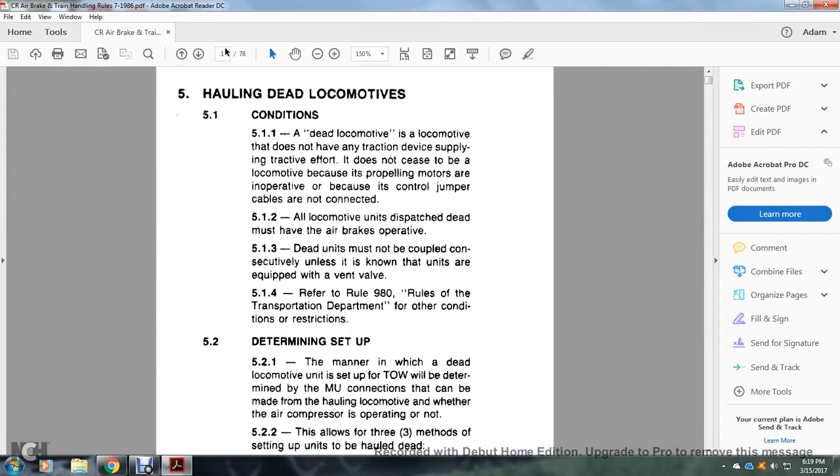Hauling dead locomotives. Consolidated Rail Corporation Air Brake Train Handling, Chapter 5.

Chapter 5, Hauling Dead Locomotives, Conditions, 5.1.1. A dead locomotive is a locomotive that doesn't have any tractive device supplying tractive effort. It does not cease to be a locomotive because the propelling motors are inoperative or because the control jumper cables are not connected. All locomotive units dispatched dead must have their air brakes operative.

Dead units must not be coupled consecutively unless it's known that the units are equipped with a vent valve. Refer to Rule 980, Rules of the Transportation Department, for other conditions or restrictions.

Determining setups, 5.2. 5.2.1. The manner of setup of the dead locomotive or tow unit will be determined by the multiple unit connections that can be made from the hauling locomotive, whether the air compressor is operating or not.

5.2.2. This allows three methods of setting up the units for hauling dead: 1. Dead in consist. 2. Dead in train, main reservoir pressure available. 3. Dead in train, main reservoir pressure not available.

5.2.3. A unit set up dead in consist must, in addition to the brake pipe, have all three multiple unit hoses — main reservoir, actuating, and application and release — connected to the hauling locomotive consist with the coupling cocks open.

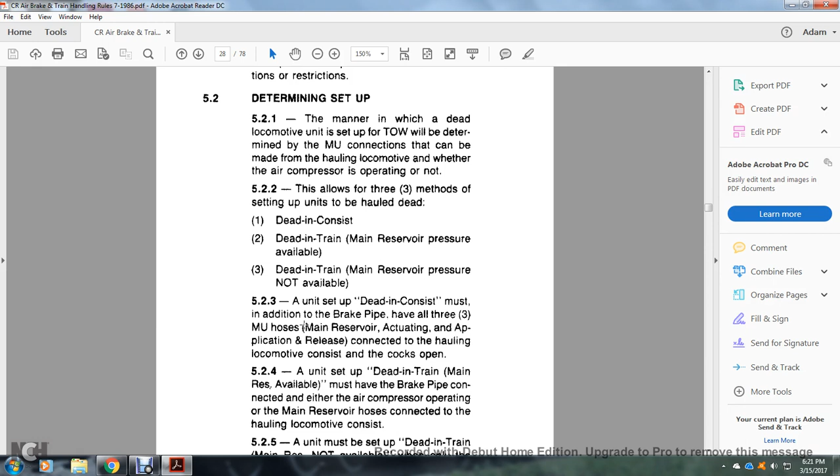5.2.4. A unit set up dead in train with main reservoir available must have the brake pipe connected, with either the air compressor operating or the main reservoir hose connected with the hauling locomotive consist.

5.2.5. A unit set up dead in train with main reservoir not available is when only the brake pipe connection can be made; the air compressor is not operating.

5.3. Setup dead in consist. Brake pipe hose coupled with the coupling cocks open. All multiple unit hoses properly coupled with the cocks properly positioned for the train lineup.

5.3.3. Automatic brake valve cut out. 5.3.4. Independent brake valve cut out by placing the double-ported cutout cock in the out or closed position, and by placing the multiple unit 2A valve in the trail, 24, or 26 position.

5.3.5. Remove and secure the automatic and independent brake valve handles. Secure the number 6 automatic brake valve handle in the running position. 5.3.6. A unit may be set up this manner whether the air compressor is operating or not.

5.4. Setup dead in train, main reservoir available. 5.4.1. Brake hose is coupled and cocks are open. Air compressor must be operating, with the main reservoir hose coupled to the hauling locomotive consist, providing main reservoir pressure for the dead unit.

5.4.3. Automatic brake valve cut out. 5.4.4. Independent brake valve cut in by placing the dual-ported cutout cock in the in or open position, or by placing the multiple unit 2A valve in the lead or dead position.

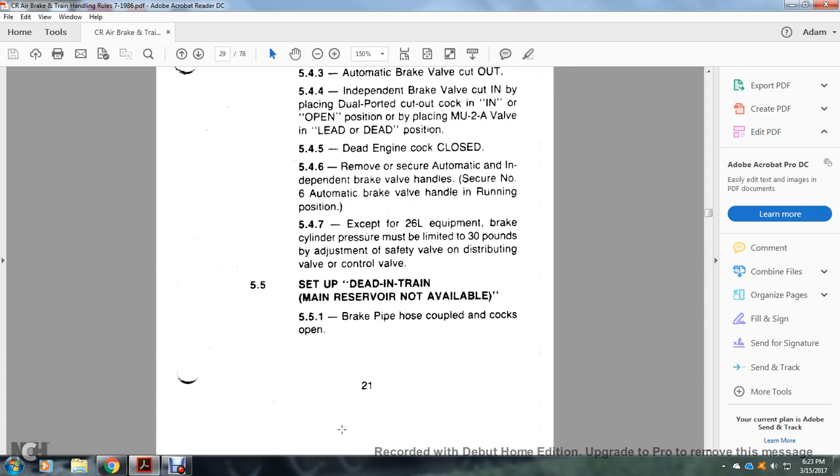5.5. Setup dead in train, main reservoir not available. 5.5.1. Brake pipe hose coupled, cocks open. Automatic brake valve cut out.

Independent brake valve cut in. Dead engine cock must be opened after the main reservoir pressure has been reduced to below 25 pounds.

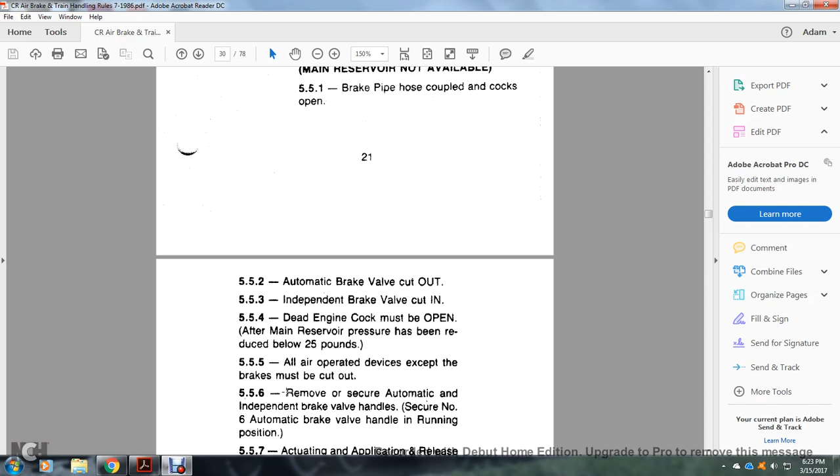5.5.5. All air-operated devices except for the brakes must be cut out. Remove and secure the automatic and independent brake valve. Secure the number 6 automatic brake valve handle in the running position.

6. Makeup of trains. 6.1. General. 6.1.1. Before connecting the yard air supply or locomotive, condensation must be blown from the pipe which supplies air pressure. 6.2. Connecting brake pipe. 6.2.1. Air hose must be coupled properly between all cars.

6.2.2. Angle cocks must be opened slowly and locked. 6.2.3. Open the angle cock nearest the locomotive or yard air supply first.

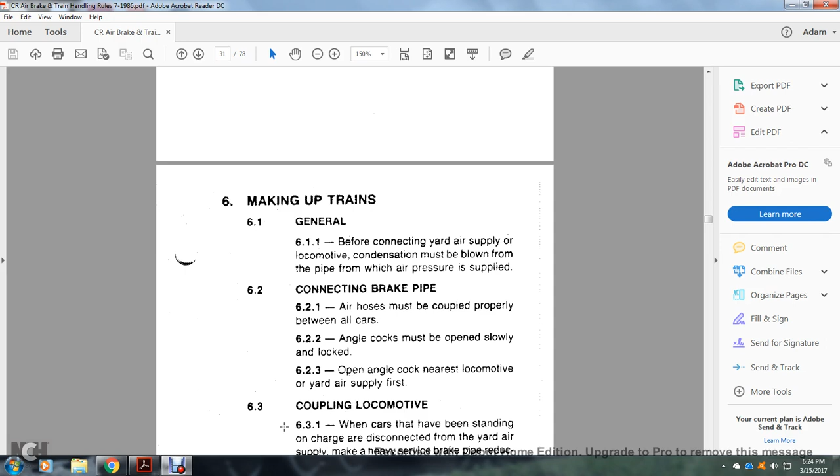6.3. Coupling locomotive. 6.3.1. When cars have been standing on charge are disconnected from the yard air supply, a service brake pipe reduction must be made by slowly opening the angle cock before coupling the locomotive or other cars. 6.3.2. When sufficient reduction is made, close the angle cock slowly to avoid unintentional release of the brakes.

6.3.3. After coupling the locomotive to the train, the couplers between the locomotive and train should be stretched to see if the coupling has made, then open the angle cock slowly. 6.3.4. While the train is being charged, locomotive brakes must remain applied.

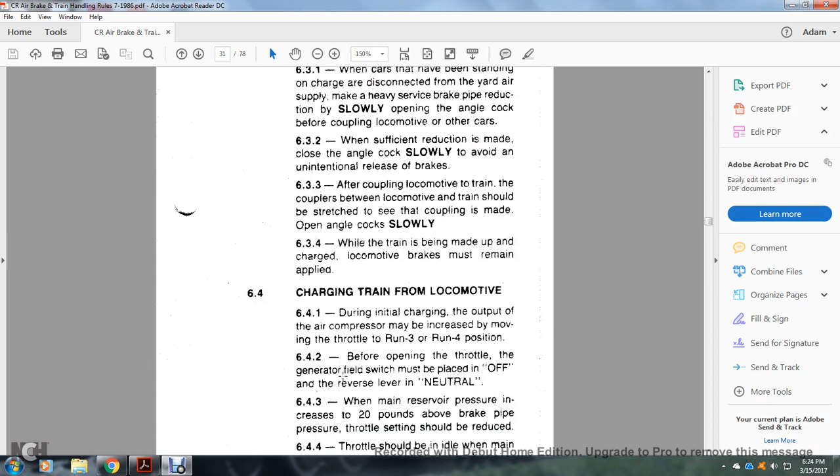6-4, charging train locomotive. 6-4-1, during the initial charging, the output of the air compressor may be increased by moving the throttle to the run 3 or run 4 position.

6-4-2, before opening the throttle, the generator field switch must be placed in the off position, and then the reverse lever in neutral. 6-4-3, when the main reservoir pressure increases to exceed brake pipe pressure by 20 pounds, the throttle setting should be reduced. 6-4-4, throttle may be idle once the main reservoir pressure exceeds brake pipe pressure by 30 pounds.

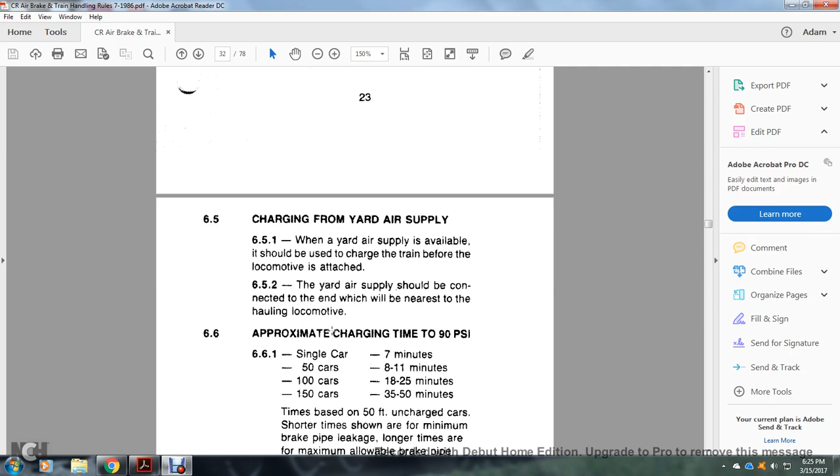6-5, charging from the yard air supply. 6-5-1, when the yard air supply is available, this should be used to charge the train before the locomotive is attached. 6-5-2, the yard air supply should be connected to the end of the train which is nearest the hauling locomotive.

6-6, the approximate charging time to 90 psi: 6-6-1, single car 7 minutes, 50 cars 8 to 11 minutes, 100 cars 18 to 25 minutes, 150 cars 35 to 50 minutes. Times based on 50-foot uncharged cars. The shorter times shown are for minimum brake pipe leakage, and the longer times are for maximum allowable brake pipe leakage.

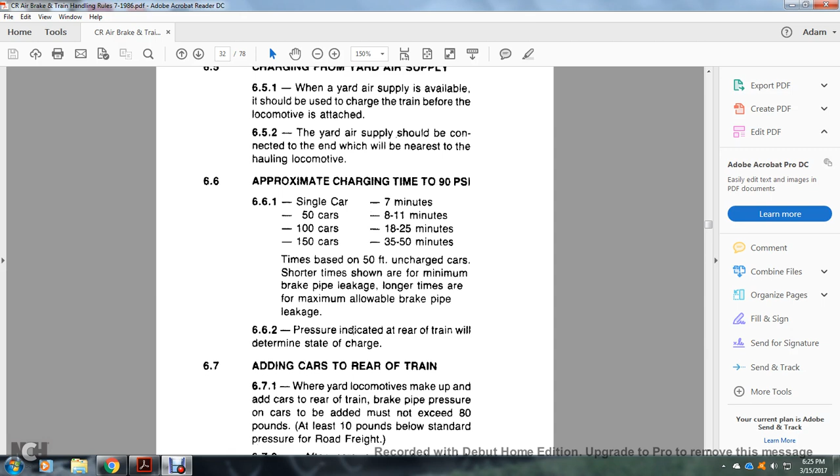6-6-2, pressure indicated at the rear of the train will determine the state of charge.

6-7, adding cars to the rear of the train. When using a yard locomotive to make up and add cars to the rear of the train, the brake pipe pressure on the car to be added must not exceed 80 pounds, at least 10 pounds below the standard pressure of the road freight. 6-7-2, after the cars are equipped, couple with stretching coupling.

6-7-3, before the air hoses are coupled, make a full service reduction on the added cars. 6-7-4, after the reduction is completed, slowly close the angle cocks between the yard locomotive and the added cars. 6-7-5, couple air hoses between the added cars and the freight train and slowly open the angle cock.

7-6, the road engineer must make a proper test of the air brakes.

7. Train air brake inspection. Brake pipe and connections: brake pipe hoses must be properly coupled and in condition for service. The angle cocks and cutout cocks must be positioned properly. Reservoir drain valves must be closed. The air brake system must be charged to the required pressure.

Examination must be made for leaks and necessary repairs made to reduce leakage to a minimum. Employees must be equipped with tools and materials necessary for changing defective air hoses, hose gaskets, and tightening leaks. Retaining valves and pipes must be in condition for service, with handles positioned properly.

Brake rigging: the brake rigging must not bind or foul. All parts of the brake equipment must be properly secured at least 2-3/4 inches above the top of the rail. Hand brakes must be released unless needed to secure cars.

Piston travel: initial terminal piston travel on a body-mounted brake cylinder which is less than 7 inches or more than 9 inches must be adjusted to a nominal 7 inches. Maximum piston travel on a truck-mounted brake cylinder must not exceed 6 inches.

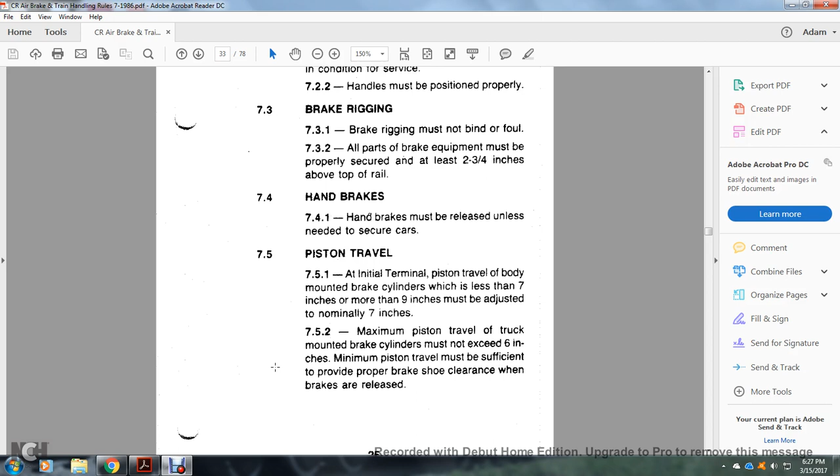Minimum piston travel must be sufficient to provide proper brake shoe clearance when brakes are released. On cars equipped with other than standard single capacity brakes, the piston travel must be adjusted as indicated on the badge plate or stenciling near the brake cylinder on the car.

Before adjusting piston travel or working on the brake rigging: the car brake must be cut out and released as described in 832. When the cutout cock is provided with a side vent for the brake cylinder pipe, the cutout may be closed and the reservoir need not be drained.

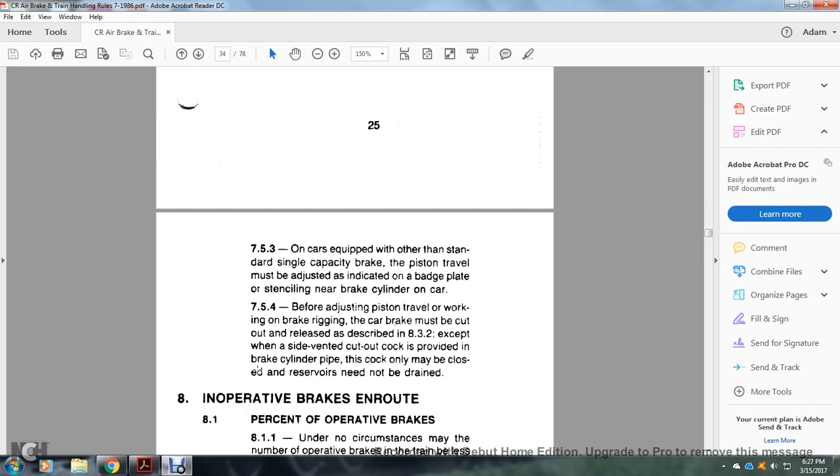8. Inoperative brakes en route. A percentage of operative brakes: 8-1-1, under no circumstances may the number of operative brakes on the train be less than 85% of all the cars in the train. Each locomotive, except the leading unit, should be counted as one car in determining the percentage of operative brakes.

When the piston travel is more than 10.5 inches, the air brake cannot be considered operative. In order to maintain 85% operative brakes, the maximum number of cars with inoperative brakes must not exceed the following ratio.

Alright, inoperative brakes. Total cars in train count: 7, 2, 14, 3, 20, 4, 27, 5, 34, 6, 40, 7, 47, 8, 54, 9, 60, 10, 67, 11, 74, 12, 80, 13, 87, 14, 94, 15, 100.

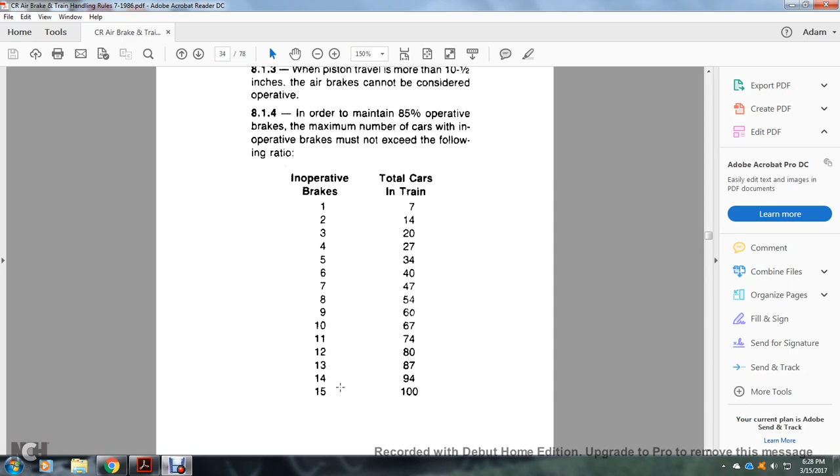8-2, placement of cars with inoperative brakes. Cars on which the air brakes become inoperative en route may be hauled without change of position in the train, provided that no more than 2 cars with the brake cutout are in consecutive order.

Cars picked up en route with inoperative brakes may be hauled to the next repair point. A defective air brake form EC100 must be attached with the brake pipe near the angle cock at each end of the car, with no more than 2 cars with the brake cutout in consecutive order. Revised June 15th, 1986.

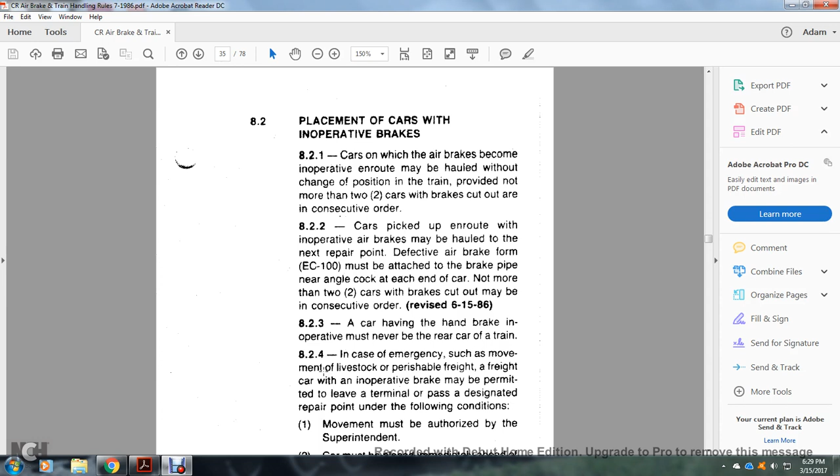A car having the handbrake inoperative must never be at the rear of the car of the train.

In case of emergency, such as the movement of livestock or perishable freight, a freight car with inoperative brakes may be permitted to leave a terminal or pass a designated repair point under the following conditions.

Movement must be authorized by the superintendent. Cars must be placed immediately ahead of the caboose or the rear of the train.

The brake hose must be connected with the angle cocks open. Brake pipe damaged cars must be coupled as described in 825.

825. If the brake pipe is damaged, the car must be coupled at the rear of the train, with the brake pipe hose connected to the angle cock, closed at the leading end of the damaged car.

826. A vehicle equipped with brake pipe only must be placed immediately ahead of the rear of the train, with the air brake operative on the rear car. No more than 2 such vehicles are to be included in any train.

83. Cutting out car brakes. Air brakes must be cut out on a car when the brake does not release properly because of binding or a fouling brake rigging.

Defective control valve brakes also must be cut out on a car being moved with overheated journals. To cut out the brake on a freight car, close the cutout cock in the branch pipe of the control valve, and place the handle in line with the pipe.

Release the air pressure from the reservoir by pulling the reservoir release rod to the limit and holding it until the air pressure is exhausted. Check that the piston rod is retracted to ensure the cylinder pressure has released, and check that the brake shoes are released from the wheels.

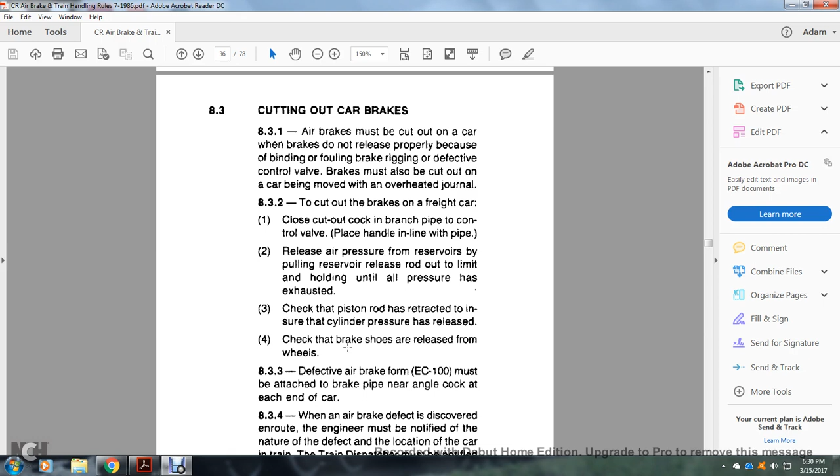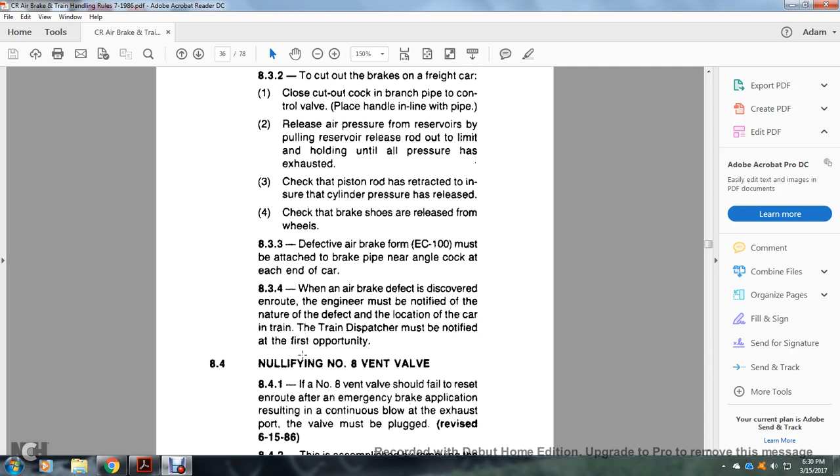A defective air brake form EC100 must be attached with the brake pipe near the angle cock at each end of the car. When a defective air brake is discovered en route, the engineer must be notified of the nature of the defect and the location of the car, and the train dispatcher must be notified at the first opportunity.

84. Nullifying the number 8 vent valve. If the number 8 vent valve should fail to reset en route after an emergency brake application, resulting in continuous blowing of the exhaust port, the valve must be plugged.

Revised June 15, 1986. This is accomplished by removing the vent protector and inserting the plug, which is integral with the vent protector, into the exhaust port.

The defective air brake form EC100 must be attached with the brake pipe near the angle cock at each end of the car.

85. Failure to maintain adequate pressure. 851. When the pressure required for safe handling of the train cannot be maintained, the train must be stopped and secured. If the main reservoir pressure drops 5 pounds below the standard brake pipe pressure, the train must be stopped using full service.

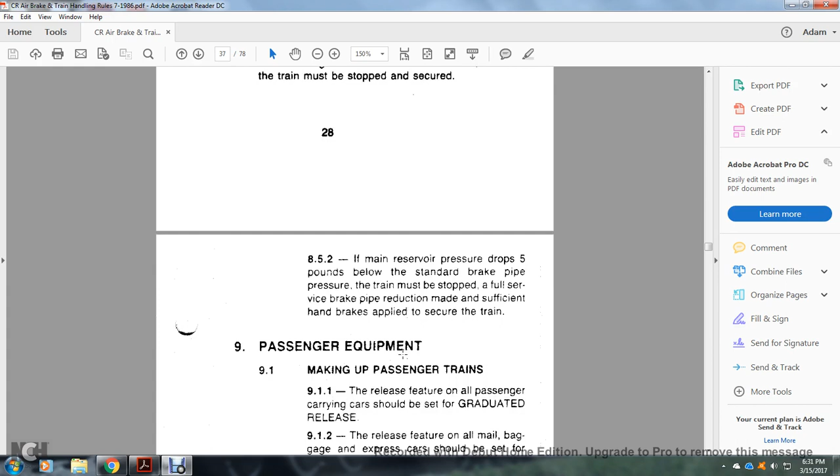All right, making up the passenger train. The release feature of all the passenger carrying cars should be set to graduated release. The release feature of all mail, baggage, and express cars shall be set for direct release.

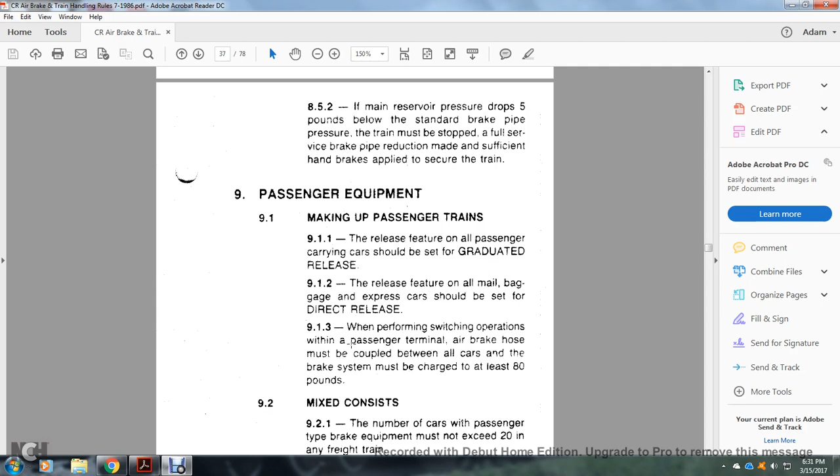When performing the switch operation for the passenger terminal, a brake hose must be coupled between all the cars, but the brake system must be charged at least 80 pounds.

Mixed consists: the number of cars with passenger type brake equipment must not exceed 20 in any freight train. All such cars must be located forward in the 40th car unless authorized by the superintendent.

When moving passengers in the freight train, the release feature will be set with direct release with the water raising and the system cut out. When moving business cars in the freight train, the release feature must be set with direct release.

9.3 Communicating signal system. The communicating signal system must be tested before leaving the initial terminal. If necessary, the train may proceed with the communication signal inoperative, but the train crew and engineer must be notified.

9.4 Brake test, passenger. The initial terminal test must be made on the passenger train under the same conditions, in the same manner as the freight train, with the following exception: the passenger train must be charged not less than 90 pounds before starting the test.

If the train is operated with electro-pneumatic brake operation, the system must be tested after testing the automatic brake. For the electro-pneumatic air test, make a 20-pound EP application, inspecting to see the air brakes have applied properly, then released properly.

9.4.2 Running tests, described in Rule 15, must be made on all passenger trains after leaving an initial terminal, at any point where the locomotive or engine crew of the train has been changed.

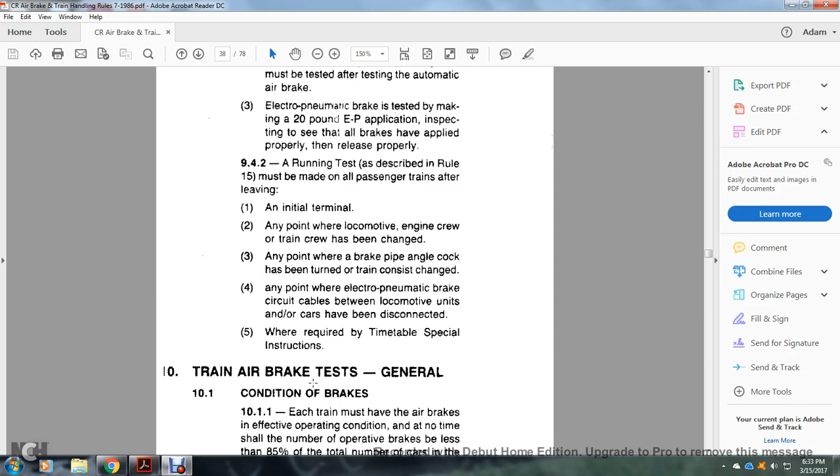At any point where the brake pipe angle cock has been turned with the train consist changes, or at any point where electro-pneumatic brake circuit cables between the locomotive units or cars have been disconnected, required by timetable special instructions. 10. Train air brake test, general.

Condition of the brakes: each train must have the air brakes in effective operating condition. At no time shall the number of operative brakes be less than 85% of the total number of cars in the train. If leaving the initial terminal, the 1,000-mile inspection must have the air brakes on all equipped cars.

The effective operating condition on all other cars: if the air brakes become inoperative, the train may continue provided not less than 85% of the cars in the train have operative brakes.

10.2 Responsibility. Supervisors, inspectors, and engineers of the train are jointly responsible for properly testing air brake equipment, or air brake equipment on the locomotive and car. They are responsible for detecting defects that can be disclosed by the required air brake test. This is required for the terminal air brake test.

Initial Terminal Test, Rule 11. The test must be made before the train is started, to determine the brakes on each car are in suitable condition to make a trip.

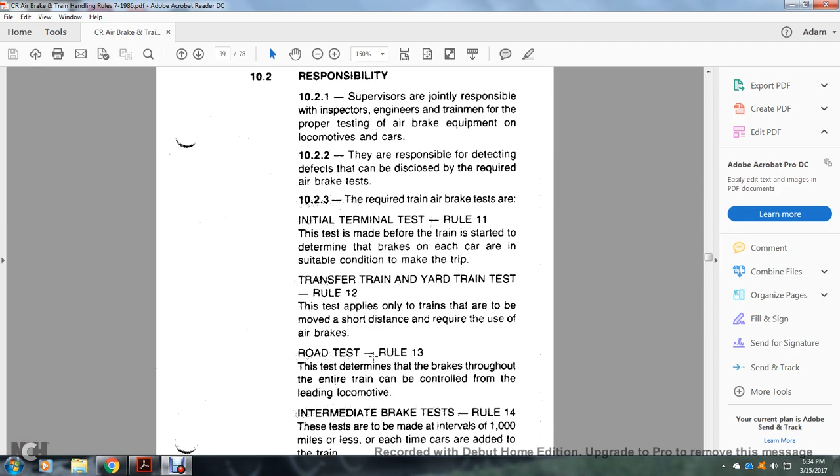Transfer train and yard train test. This test applies only to trains that are to be moved short distances, as required for the use of air brakes.

Road test, Rule 13. This test determines the brake throughout the entire train can be controlled with the lead locomotive.

The intermediate brake test, Rule 14. These tests are to be made at intervals of 1,000 miles or less, each time a car is added to the train. Running test, Rule 15.

This test is made while the train is in motion to determine when the brakes are capable of slowing the train. 10.2.4. When air brake tests are made with the train under the jurisdiction of employees, make sure such a test must not move unless authorized to do so.

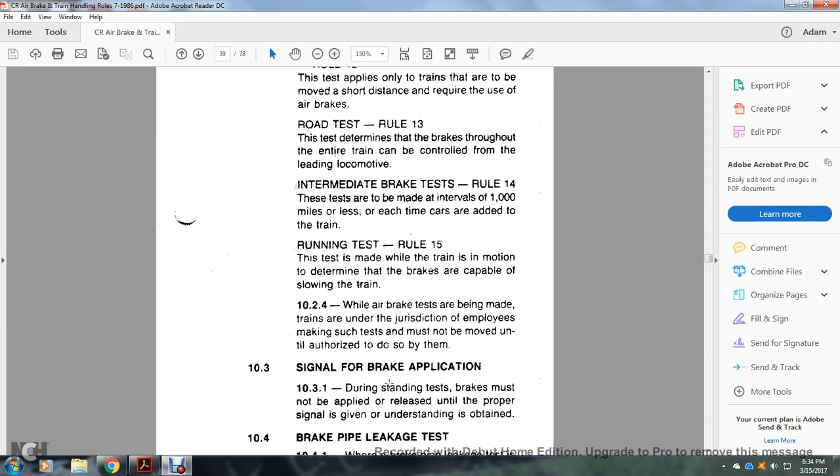10.3 Signal for brake application. During the standing test, the brakes must not be applied or released until the proper signal is given and understanding is obtained.

10.4 Brake pipe leakage test. Where the brake pipe leakage test is made on the locomotive, it should be made in the following manner: 1. Charge the brake pipe pressure within 15 pounds of the feed or regulating valve.

Reduce the brake pipe pressure 20 pounds. Wait for the exhaust to stop blowing. Cut out the pressure maintaining feature. Wait an additional 60 seconds for the brake pipe to settle throughout the train.

Check the brake pipe leakage for 1 minute, observing the brake pipe gauge. Brake pipe leakage must not exceed 5 pounds per minute. Hand brakes must be released on all cars and locomotives before the train departs.

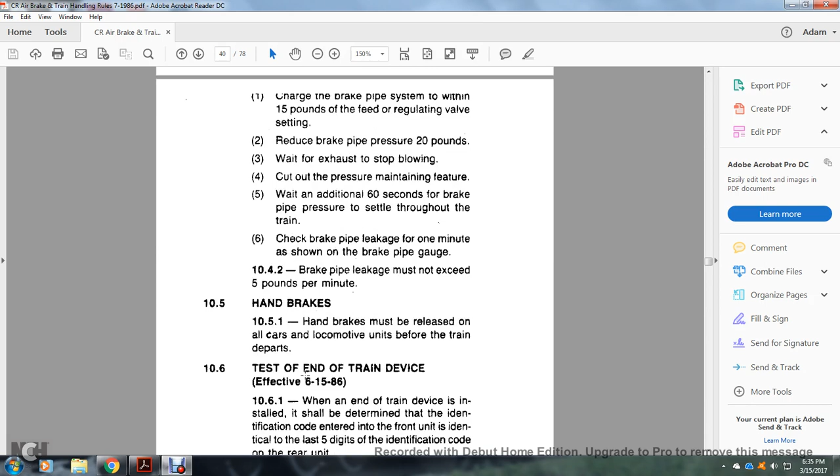Testing the end of the train device. When installed, the identification code entered at the front unit should be determined using the last 5 digits of the identification code of the rear unit. After charging the train, the pressure displayed on the front unit must be compared with the pressure displayed on the rear unit when the test button is pressed.

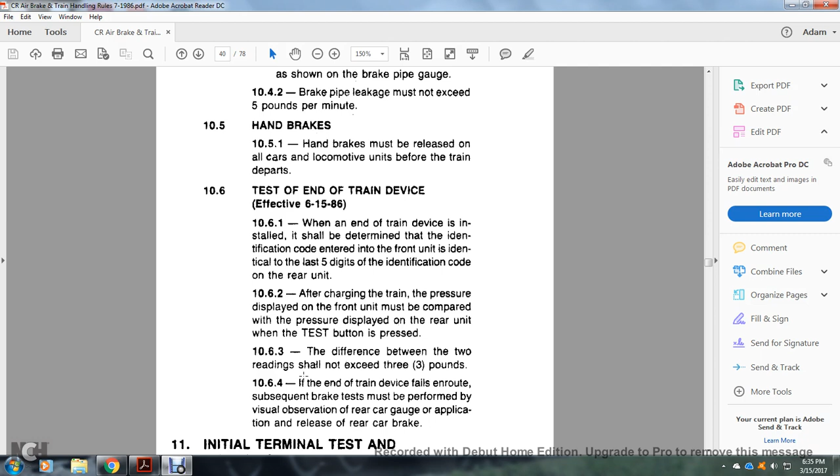Rule 10.6.3: the difference between the two readings should not exceed 3 pounds. If the end of train device fails en route, the subsequent brake test must be performed by visual observation of rear car gauge application and release of the rear car brake.

Rule 11: Initial terminal test and inspection, when required. When the train is originally made up, or when the train consist is changed either by adding or removing cars, a solid block test is required unless the train brake system remains charged.

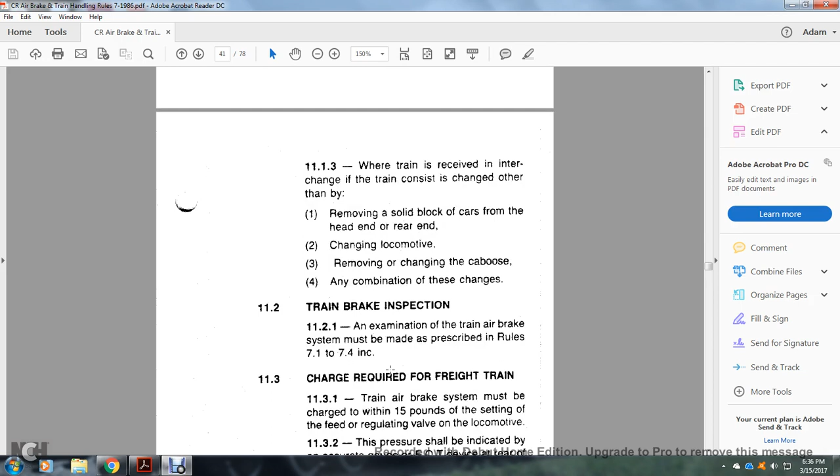Rule 11.2: The train brake inspection examination of the train air brakes must be made as prescribed in Rule 7.1 through 7.4 in this document. Rule 11.3: Charge required for freight trains.

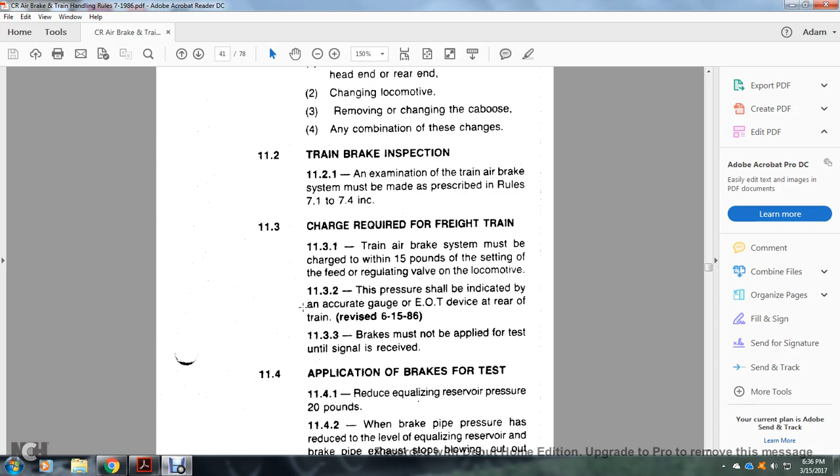The train air brake system must be charged within 15 pounds of the setting of the feed valve of the locomotive. The pressure shall indicate on an accurate gauge or end of train device at the rear of the train. Rule 11.3.3: The brake must not be applied for the test until the signal is received.

Rule 11.4: Application of the air brake test. Reduce the equalizing reservoir pressure by 20 pounds, lessening the brake pipe pressure. When brake pipe pressure reduces to the level of the equalizing reservoir pressure, the brake pipe exhaust stops blowing.

If the pressure maintaining feature is equipped on a 26L brake valve, turn the brake valve cut-off valve out. Wait 60 seconds for the brake pipe pressure to settle throughout the train, then observe the brake pipe leakage for the next minute on the brake pipe gauge.

Rule 11.5: Brake pipe leakage must not exceed 5 pounds per minute.

Rule 11.6: Inspection of the brake application. Train brakes must be inspected to determine that the angle cocks are properly positioned and that brakes are applied on each car and locomotive unit.

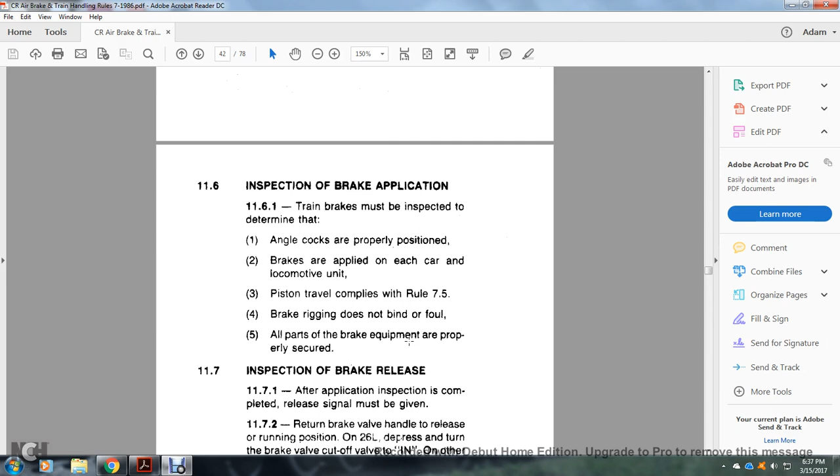The piston travel complies with Rule 7.5, the brake rigging does not bind or foul, and all parts of the brake equipment are properly secured.

Rule 11.7: Inspection of brake release. After the application inspection is completed, the release signal must be given, returning the brake valve handle to release or run position. On a 26L, turn the brake valve cut-off valve in.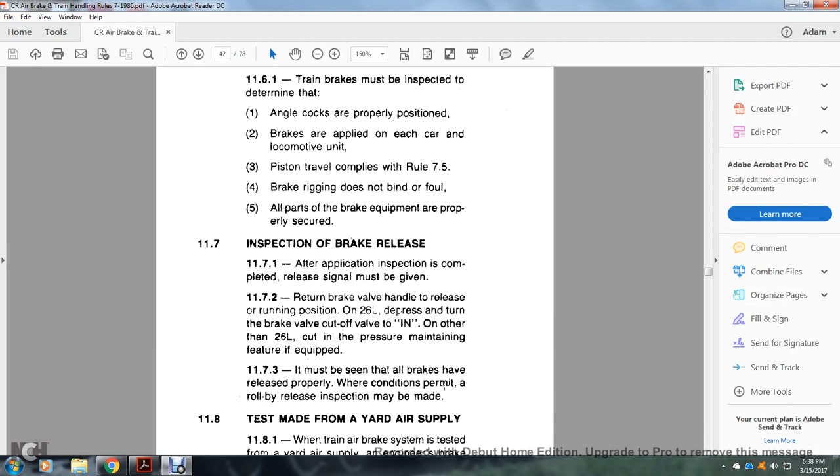Rule 11.8: Test may be made at a yard air supply. When a train air brake system is tested with yard air supply, the engine brake valve standard test device must be used. The test device should be connected to the end nearest to the hauling locomotive.

The train air brake system must be charged not less than 65 pounds, indicated with an accurate gauge at the opposite end of the test device. When properly charged, make a 15 pound brake pipe service reduction.

Wait 60 seconds for the brake pipe pressure to settle throughout the train, then observe the brake pipe pressure for 1 minute. Leakage must not exceed 5 pounds per minute.

If the brake pipe pressure has not reduced to 57, further reduce the pressure to this amount and inspect the trains as specified in Rule 11.6.

After the application inspection is completed, release the brakes and make inspection as specified in Rule 11.7. When practicable, the train brakes should be kept charged until the road locomotive is coupled.

After testing the brakes, if the train has been off charge for more than 2 hours, initial terminal testing must again be performed.

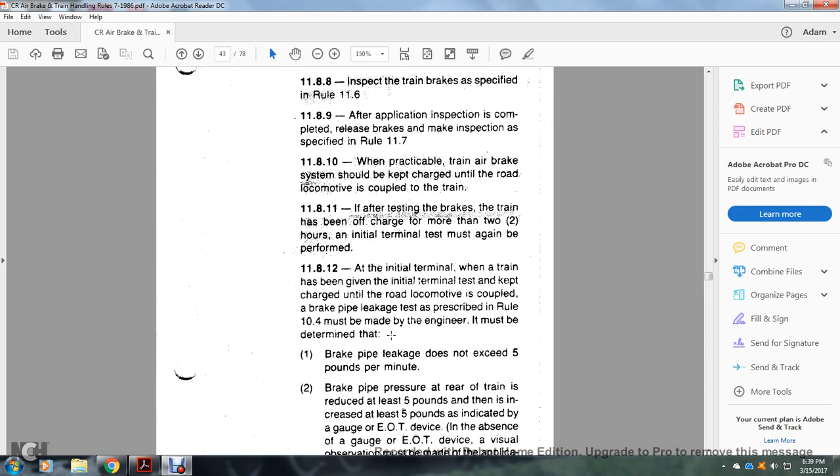At the initial terminal, when the train has been given the initial terminal test and the road locomotive is coupled, a brake pipe leakage test as prescribed in Rule 10.4 must be made by the engineer. It must be determined that the brake pipe leakage does not exceed 5 pounds per minute.

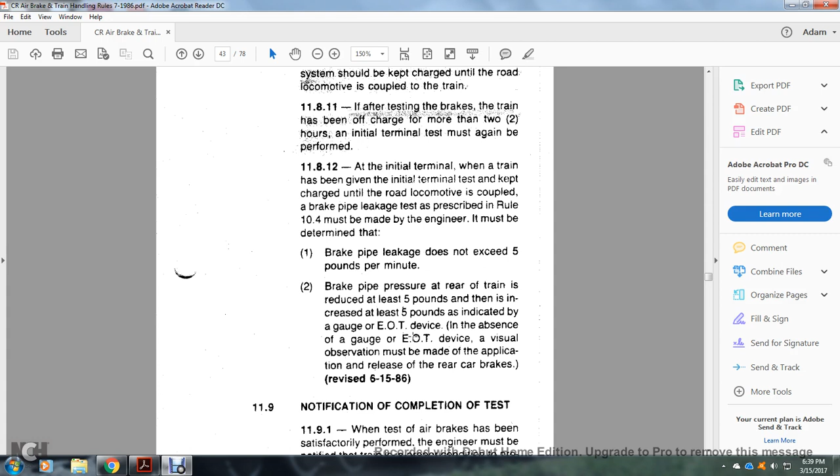The brake pipe pressure at the rear of the train is reduced to at least 5 pounds, then increased to at least 5 pounds, as indicated by the gauge of the end of train device. In the absence of the gauge of the end of train device, a visual observation must be made of the application and release of the rear car brakes.

11.9, notification of completion of the test. When the air brake test has been satisfactorily performed, the engineer must be notified that the train is in proper condition to proceed, per the rule revised June 15, 1986.

The notification must be made by the qualified person participating in the test, or by one who has knowledge that it was made. When practical, the notification should be in writing on form MP261C.

11.9.4, notification must be in writing when the employee making the test goes off duty, when the road crew takes the train off duty, or when the train is to be moved over 500 miles without being subject to another test.

Section 12, transfer train and yard train tests. For movement not exceeding 20 miles an hour: couple the air brakes between all the cars, charge the brake system within 15 pounds of the feed regulating valve setting, make a 20-pound service brake pipe reduction, determine that the brakes are applied on each car, and observe that all the brakes are releasing properly prior to movement as they are passing.

12.2, movement exceeding 20 miles an hour. The train must be given an initial terminal inspection test, per the rule revised June 15, 1986.

Section 13, road test set and release when required: when the locomotive or the caboose is changed, revision June 15, 1986; when blocks of cars are cut off, with the cut from the rear or head end of the train consist, the cut otherwise remaining intact, effective June 15, 1986; after the angle cock is closed on a freight train, for any reason and then reopened on June 15, 1986.

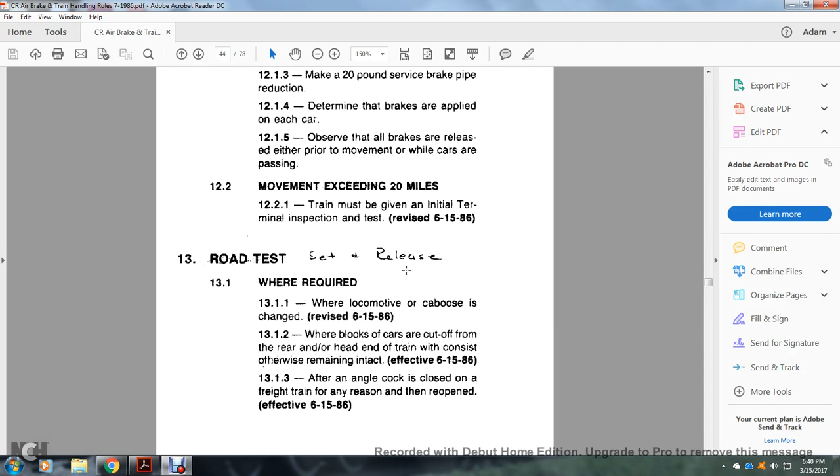13.2, procedures. After the train is reassembled, charge the brake pipe system to within 15 pounds of the feed regulating valve setting, as indicated at the rear of the train by the rear car gauge or end of train device, June 15, 1986.

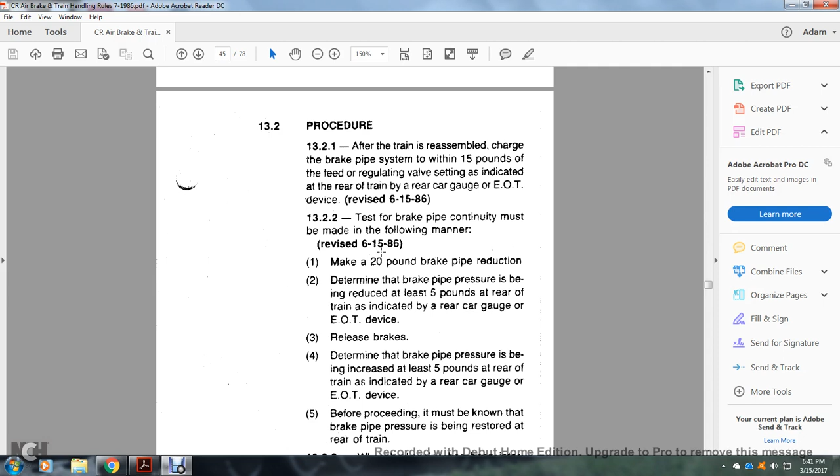The test for brake pipe continuity must be made in the following manner: apply the brakes with a 20-pound brake pipe reduction, and determine that the brake pipe pressure is being reduced by at least 5 pounds at the rear of the train, as indicated by the rear car gauge or end of train device.

Step 3, release brakes. Determine that the brake pipe pressure is being increased by at least 5 pounds at the rear of the train, as indicated by the rear car gauge or end of train device. Before proceeding, it must be known that the brake pipe pressure is being restored at the rear of the train.

When the brake pipe has been interrupted but no change is made in the train consist including locomotive and caboose, the requirements of the road test are fulfilled if it is known that the brake pipe pressure is being restored at the rear of the train, as indicated by the rear car gauge or end of train device.

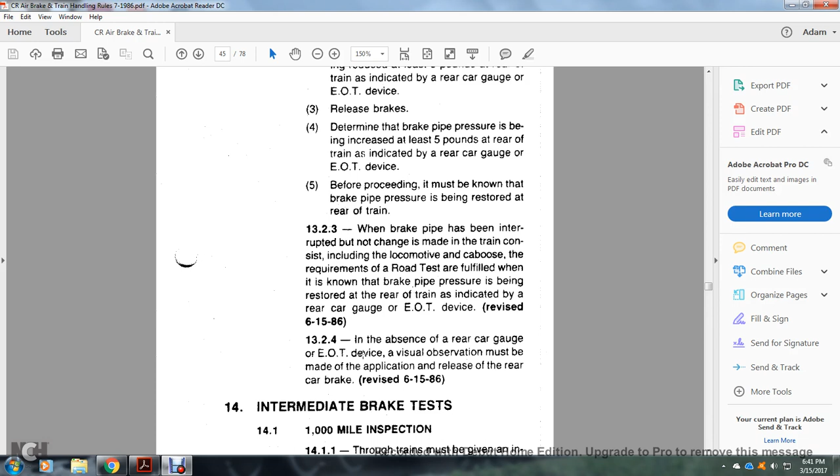Revised June 15, 1986: in the absence of the rear car gauge or end of train device, a visual observation must be made of the application and release of the rear car brakes, June 15, 1986.

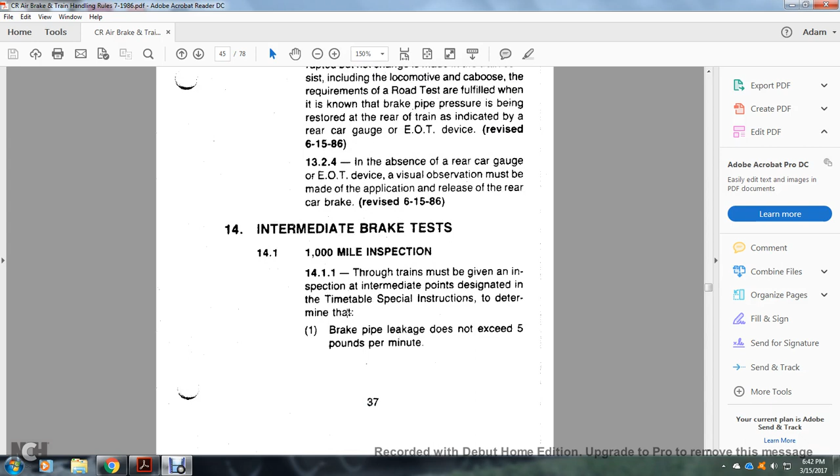Intermediate brake test, 1,000-mile inspection. The train must be given an inspection at intermediate points designated in the timetable special instructions, determining that the brake pipe leakage does not exceed 5 pounds per minute.

Brakes are applied on each car for a 20-pound service brake pipe reduction. The brake rigging is properly secured and does not bind or foul. The piston travel does not exceed 10.5 inches, effective June 15, 1986.

All the brakes release. The release inspection may be made either while the train is standing or when it departs, with the speed held suitable to allow inspection of the entire train.

14.2, the test of cars added to the train. When cars have previously been given an initial terminal test or added to the train, a road test as prescribed in Rule 13.2.2 must be made before proceeding, June 15, 1986.

When cars have not been previously charged with the tested cars added to the train, initial terminal tests may be made on these cars.

When placed in the train at the next terminal where the facilities are available, cars are given special attention. An initial terminal inspection is performed, and their air brakes must be tested in the following manner before departure, at the location where the cars are placed in the train.

Charge the train brake system within 15 pounds of the feed or regulating valve setting as indicated at the front or rear of the train. Test that brake pipe leakage does not exceed 5 pounds per minute. Determine that the brakes of each added car will apply from a 20-pound brake pipe reduction, and that all air brakes and hand brakes on added cars are released. Road tests are prescribed in Rule 13.2.2 and shall be made at the same time added cars are tested.

Revised June 15, 1986. Change of crew, no change of consist: the engineer taking charge of the train must ascertain from the incoming engineer, either personally or on prescribed form MP261C, that the brakes are in operative condition. When the condition of the brakes cannot be ascertained from the incoming engineer and the prescribed form is not available, the engineer taking charge of the train will make a road test for the brakes before proceeding.

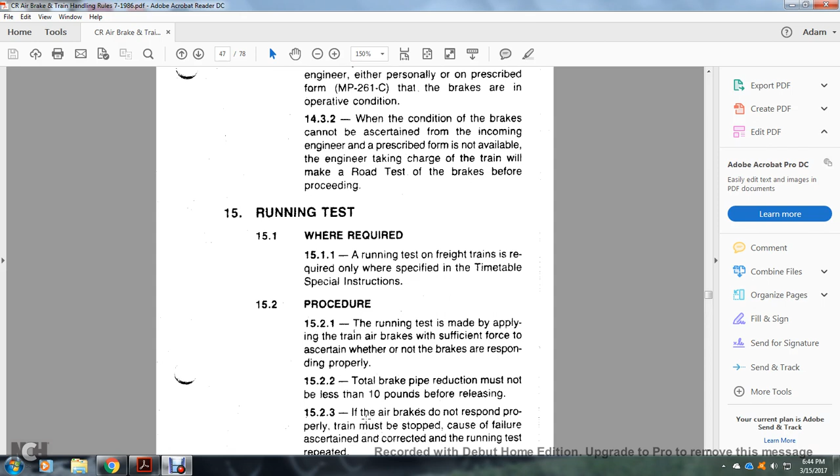15. Running test. When required, a running test on freight trains is required only as specified by timetable, special instruction, and procedure. The running test is made by applying the train air brakes with the automatic brake valve to determine whether or not the brakes are responding properly. The total brake pipe reduction must not be less than 10 pounds before releasing. If the brakes do not respond properly, the train must be stopped to determine the cause of the failure, have it corrected, and the running test repeated.

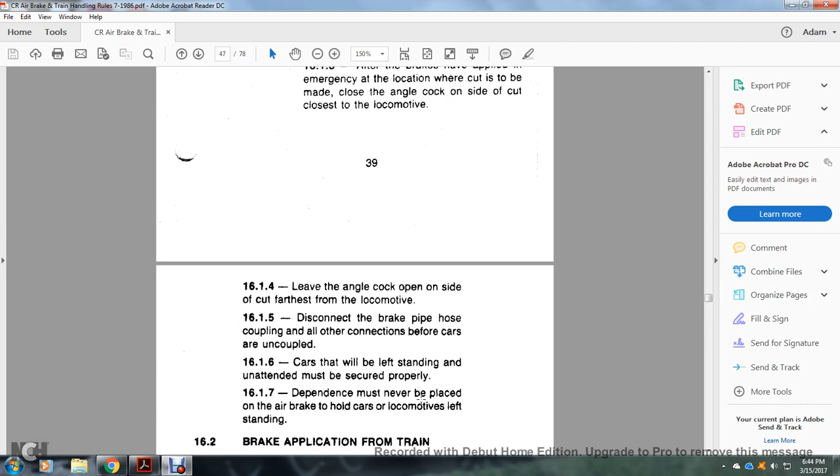16. Brake rules general. Cutting off cars and locomotive from the train: make a total brake pipe reduction of 20 pounds. 30 seconds later, move the brake valve handle to the emergency position after the brakes have been applied, at the location where the cut is being made. Close the angle cock on the side of the cut closest to the locomotive, and leave the angle cock open on the side of cut furthest from the locomotive. Disconnect the brake pipe hose coupling at all connections before the cars are uncoupled. Cars that are left standing and unattended must be secured properly. Dependence must never be placed on the air brake to hold cars and locomotives left standing.

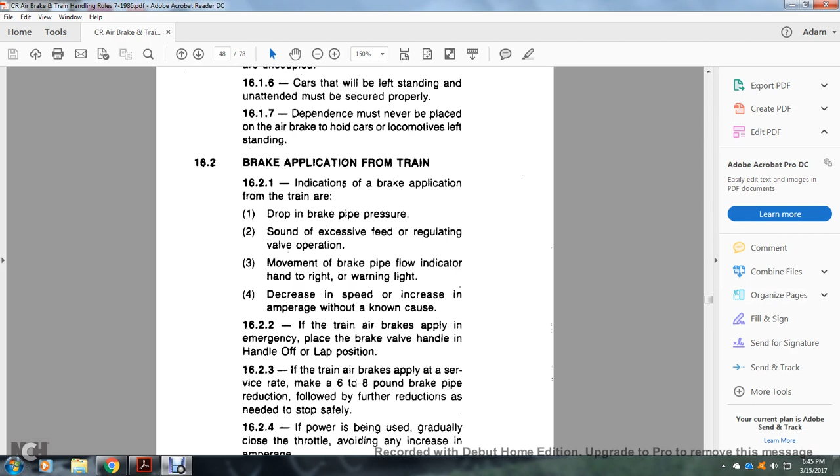16.2. Brake application from the train. Indications of a brake application from the train are a drop in brake pipe pressure, the sound of excessive feeding of the regulating valve, movement of the brake pipe flow indicator hand to the right, and a warning light, as well as a decrease in speed and increase in amperage without known cause. If the train air brake applies in emergency, place the brake valve handle in the handle-off or lap position. If the train air brake applies at a service rate, make a 6 to 8 pound brake pipe reduction and follow with further reductions as needed to stop safely. If power is being used, gradually close the throttle, avoiding any increase in amperage, and reduce the locomotive brake cylinder pressure as necessary to prevent sliding wheels and harsh slack action.

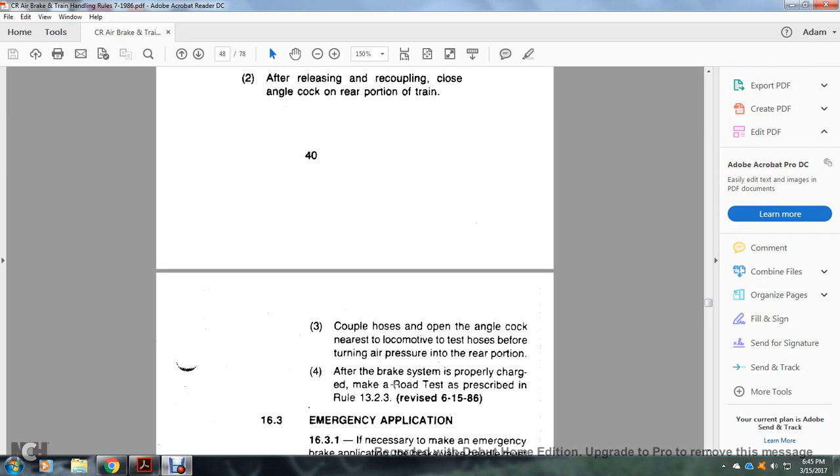After the train has been stopped to assist in locating leakage, release the automatic brake valve handle to the release or running position. If the train has been broken in two, close the angle cock at the rear end of the car immediately in front of the break. After releasing and recoupling, close the angle cock at the rear portion of the train, couple the hoses, and open the angle cock nearest the locomotive to test the hose before turning air pressure into the rear portion. After the brake system is properly charged, make a road test as prescribed in Rule 13.2.3, revised June 15, 1986.

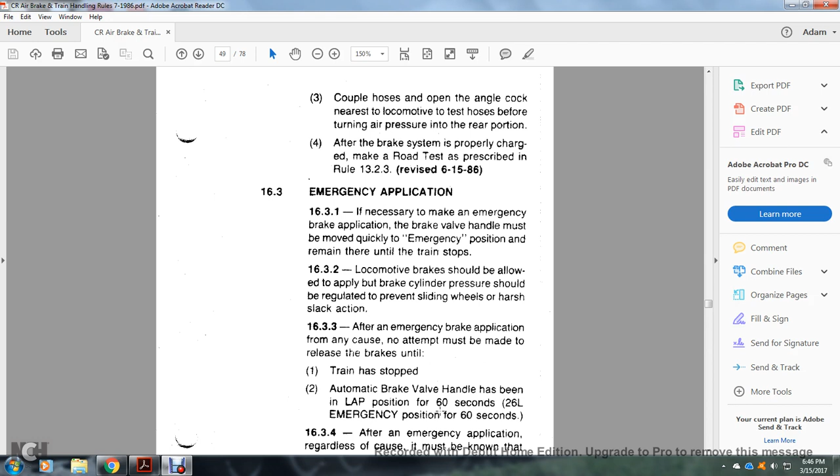16.3. Emergency application. If necessary to make an emergency brake application, the brake valve handle must be moved quickly to the emergency position and remain there until the train stops. Locomotive brakes should be allowed to apply, and the brake cylinder pressure should be regulated to prevent sliding wheels or harsh slack action. After an emergency brake application for any cause, no attempt must be made to release the brake until the train has stopped, and the automatic brake valve handle has been in the lap position for 60 seconds, or in emergency position for 60 seconds. 16.3.4. After the emergency application, regardless of the cause, it must be confirmed that brake pipe pressure is being restored at the rear of the train before proceeding.

16.4. Sticking brakes. Train and engine crews must keep a lookout for brakes sticking on the train and on trains being met or passed.

They must advise one another as to the location and portion of the train at which indications are found with the brakes sticking. Probable causes of brakes sticking are: handbrake not fully released, overcharged brake system, retaining valve not in the release position, binding or fouling of brake rigging, excessive brake pipe leakage, defective control valve, improper handling of automatic brake valve such as failure to make at least a 10-pound reduction before releasing and releasing before the brake pipe exhaust stops blowing.

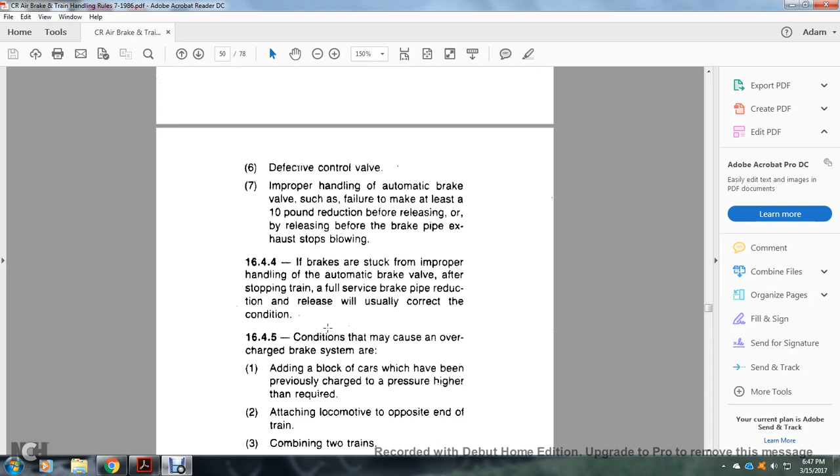16.4.4. If the brakes are stuck due to improper handling of the automatic brake valve after the stopping of the train, a full-service brake pipe reduction and release will usually correct the condition.

16.4.5. Conditions that may cause an overcharged brake system are: adding a block of cars which have been previously charged with pressure higher than required, attaching locomotive to the opposite end of the train, combining two trains, recoupling after separation in train, effective June 15, 1986.

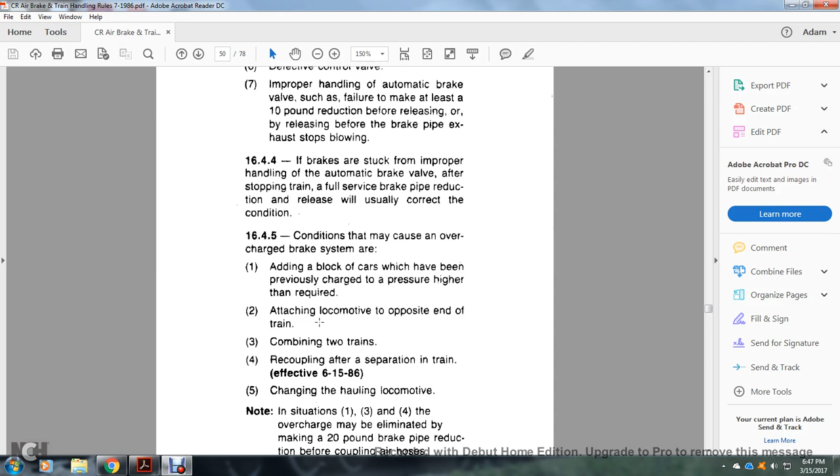Changing the hauling locomotive. In situations 1, 3, and 4, the overcharge may be eliminated by making a 20-pound brake pipe reduction before coupling the air hose.

16.4.6. To reduce an overcharged brake system while the train is standing: adjust the feed of the regulating valve to the desired brake pipe pressure setting. Place the automatic brake valve handle in the emergency position for 1 minute. Place the brake valve handle in the release running position until the brake pipe gauge shows 20 pounds.

Place the brake valve handle in the lap position. Allow all the brake pipe pressure to exhaust for 1 minute. Then place the automatic brake valve handle in release running to recharge the train.

This method can be used to reduce the reservoir pressure 10 pounds below the initial pressure.

16.5. Undesired release. 16.5.1. The ABD or ABDW control valves have an accelerated release feature that is very sensitive to an increase in the brake pipe pressure. A slight increase in air pressure causes the valve to move to release, and it will serially transmit release rapidly through the train.

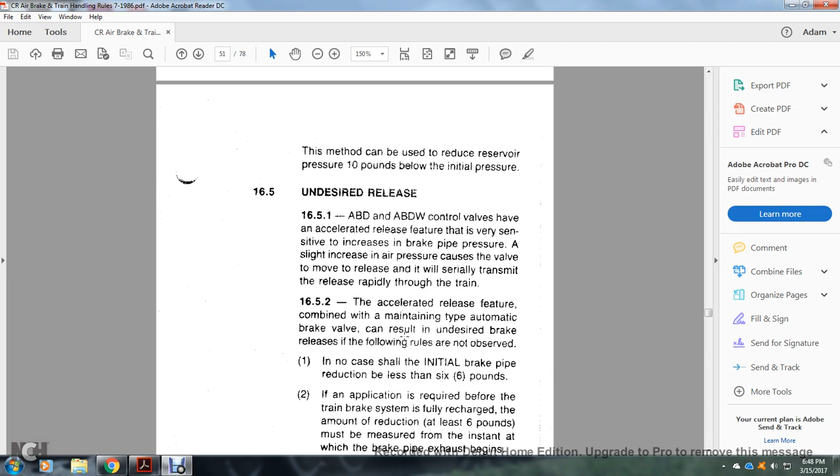The accelerated release feature combined with the maintaining type automatic brake valve can result in undesired brake release, and the following rules are to be observed: in no case shall the initial brake pipe reduction be less than 6 pounds.

If the application is required before the train brake system is fully recharged, the amount of the reduction, at least 6 pounds, must be measured from the instant at which the brake pipe exhaust begins.

The emergency brake valve on the locomotive is to be used only in an emergency situation. Under no circumstances should an attempt be made to make a brake application other than emergency with this valve, as it may result in undesired release of an automatic service application of the train.

After moving the handle on the caboose valve to any application position, it must not be returned to the closed or release position until after the train has stopped. The handle must be moved to the extreme application position before moving it to closed or release position.

If the 26C brake valve is equipped with a 3-position cutout valve - freight, passenger, cutout - it must never be placed in the passenger position when hauling a freight train.

16.6. Securing trains on the grade. When securing the train on the grade, handbrakes must be applied starting at the lowest level of the grade. When ready to proceed, the handbrakes must remain applied until the air brake system is charged and proper testing has been made.

16.3. Handbrakes are to be released starting from the highest level of the grade. Dependence must never be placed on the air brakes to hold equipment left standing.

16.7. Double heading and helper locomotives. When more than one locomotive is attached to the train in double heading or helper service, the engineer of the lead locomotive in the direction of movement shall operate the train air brakes. On all locomotive units within the train, except for the leading unit, the brake valve cutout cock must be closed.

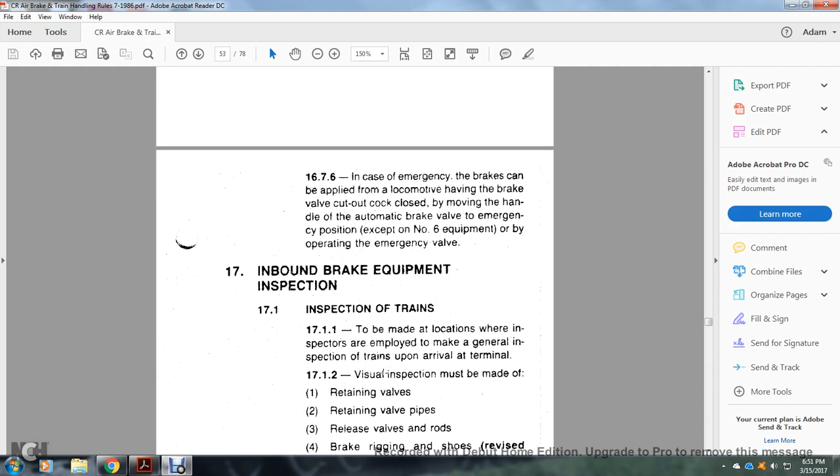Visual inspection must be made of the retaining valve pipe, the release valves and rods, brake rigging and shoes, revised on June 15, 1986, safety supports, handbrakes, brake hose, and position of angle cocks. Necessary repairs should be made promptly where practical. Any cars that cannot be repaired promptly must be marked for the repair tracks.

18. Freight train handling, general instructions. The engineer must handle the train in a safe and fuel efficient manner, taking full advantage of throttle modulation and dynamic braking where conditions permit.

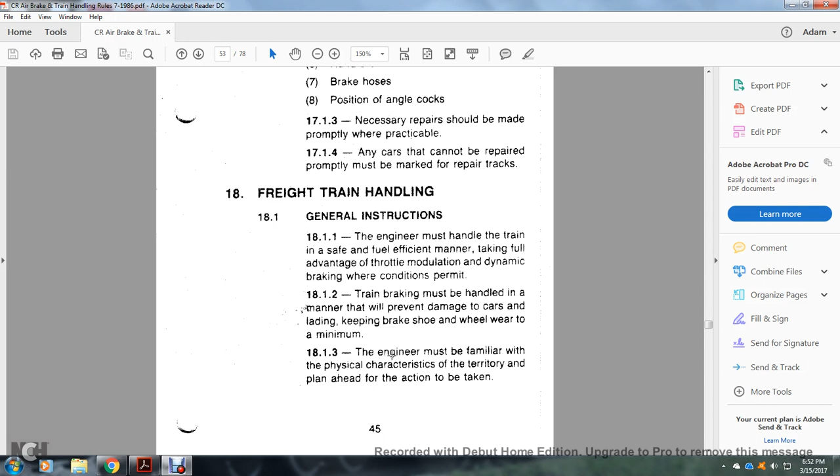Train braking must be handled in a manner that will prevent damage to the cars and lading, keeping brake shoe and wheel wear to a minimum. The engineer must be familiar with the physical characteristics of the territory and plan ahead for the action to be taken.

18.1.4. The following factors will affect the slowing and stopping ability of the freight train: speed, weight, and length of the train, grade, weather conditions, brake pipe leakage, and gradient.

Prolonged use of locomotive air brakes or excessive brake cylinder pressure, especially at high speed, is prohibited. Such action would cause burned and damaged brake shoes and overheated wheels.

18.1.7. During switching operations, the throttle and independent brake valve must be handled in a manner that will permit slack to be adjusted smoothly.

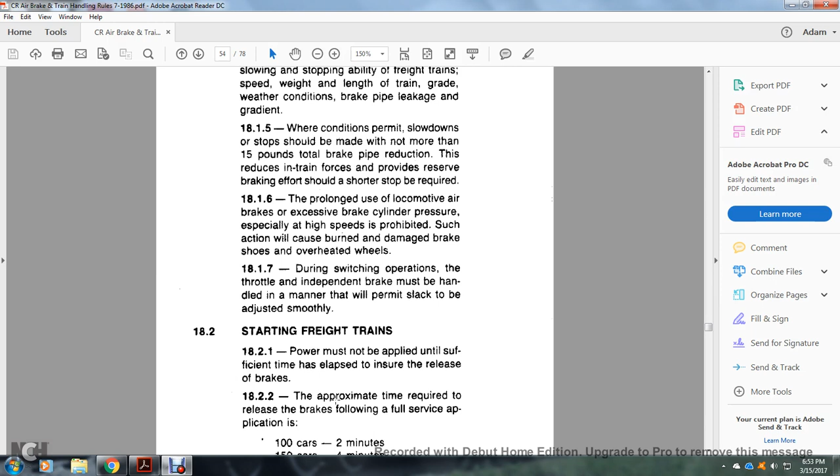18.2. Starting freight trains. Power must not be applied until sufficient time has elapsed to ensure release of the brakes. 18.2.2. The approximate time required for release of brakes following a full service application is: 100 cars, 2 minutes; 150 cars, 4 minutes; 200 cars, 6 minutes.

Add 2 minutes to these times if the brakes have been applied in emergency. 18.2.3. A train must be started in the lowest throttle position possible.

18.2.4. Do not advance the throttle while the load meter indicates increasing amperage. 18.2.5. If the train does not start after applying reasonable power, the throttle must be returned to idle, and the cause determined before further advancing the throttle, as this may cause train separation, damage to the traction motor, or rail burn.

When necessary to take the slack out of the train, it must be taken carefully to avoid harsh action or rollback. 18.2.7. While the train is being started, locomotive speed must be kept slow and uniform until the entire train is moving.

When starting the train on a curve, avoid higher amperage that could cause stringlining. 18.3. Use of sand.

When it is necessary to use sand, the number 1 truck or lead axle sand switch should be used to prevent slipping of the locomotive's wheels.

Slipping of the locomotive wheels causes severe stress on the draft system and damage to the rails, and should be avoided. Do not apply sand while wheels are slipping.

Throttle must be reduced to stop the wheel slipping. Start sanding and advance the throttle slowly. Where conditions require, sand should be used as the train is stopping to avoid slipping when starting.

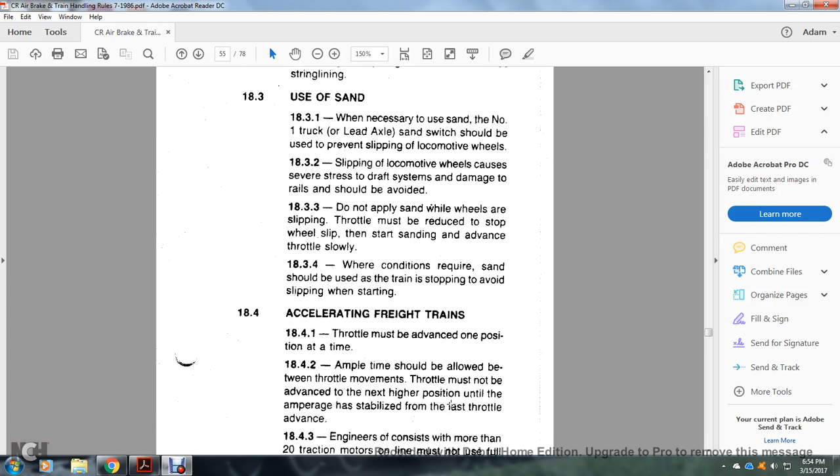18.4. Accelerating freight: the throttle must be advanced one position at a time. Ample time should be allowed between throttle movements. The throttle must not be advanced to the next higher position until the amperage has stabilized from the last throttle advance. Engineers of consists with more than 20 traction motors online must not use full power in pulling below 12 miles an hour, and must use care in applying power at speeds below 20 miles an hour.

18.5. Braking freight trains. Where conditions permit, dynamic braking and throttle reductions must be used in lieu of air braking to reduce the train. Initial reductions of less than 6 pounds must not be attempted, as reductions of less than 6 pounds may result in an unintentional release of the train brakes.

18.5.3. Braking should be started with sufficient distance from the objective point to allow the use of split reduction. When conditions permit, the minimum reduction position should be used for the initial reduction. If conditions permit, wait 20 seconds after the brake pipe exhaust stops blowing from the initial reduction then follow with additional reductions as required.

18.5.6. When braking freight trains with the power off, the throttle should be reduced slowly to idle, allowing the slack to bunch gradually as necessary. The dynamic brake or independent brake valve, if the dynamic brake is not available, may be used to bunch slack prior to the initial reduction.

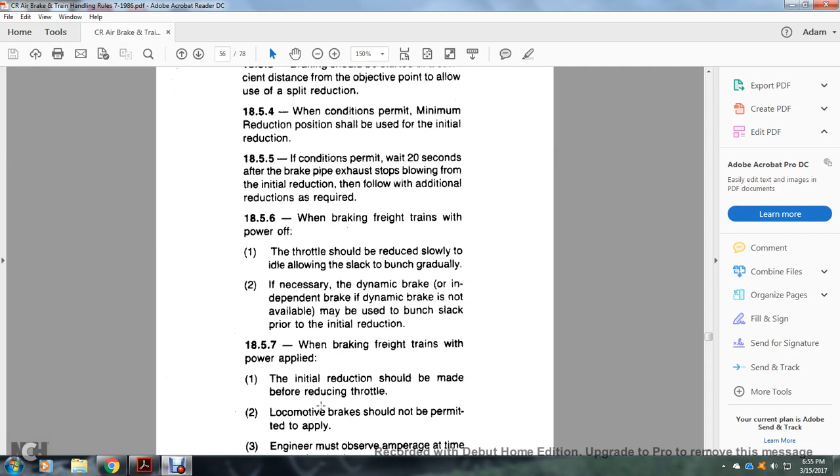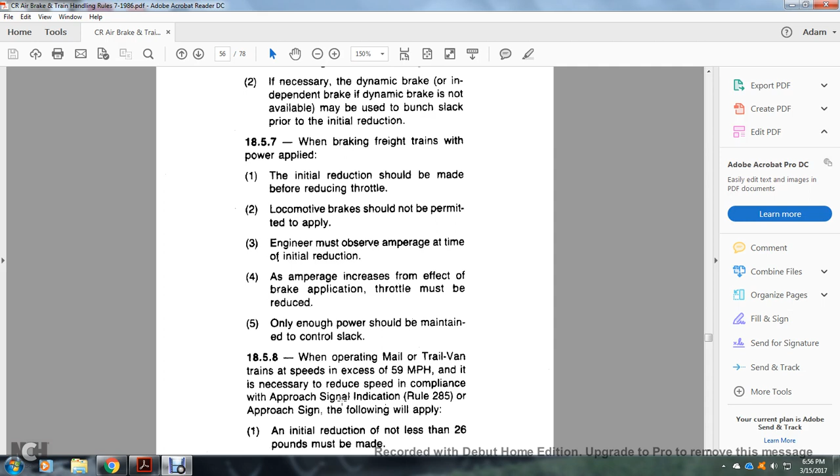18.5.8. When operating a mail or trail van train proceeding at speeds in excess of 59 miles an hour, when it is necessary to reduce speed in compliance with an approach signal indication under rule 285, or approach sign, the following will apply: an initial reduction of not less than 26 pounds must be made. The throttle must be reduced gradually to idle within 25 seconds. Locomotive brakes may be permitted to apply, limiting locomotive brake cylinder pressure to that necessary to prevent wheel sliding.

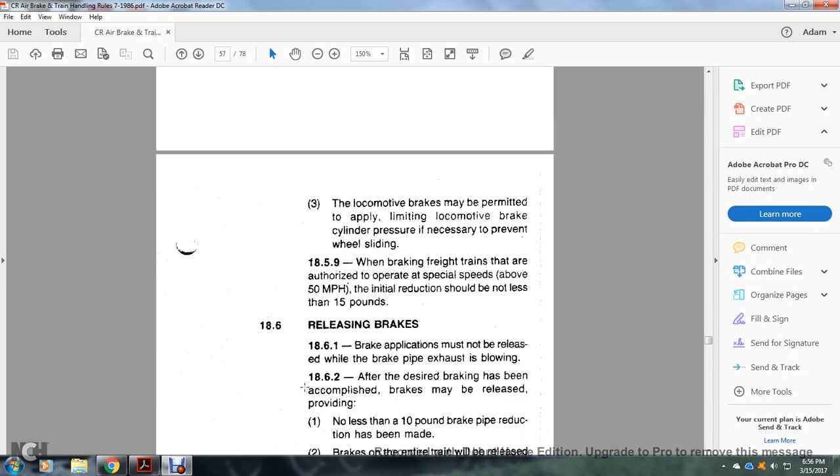18.5.9. When braking freight trains authorized to operate at special speeds above 50 miles an hour, the initial reduction should not be less than 15 pounds.

18.6. Releasing brakes. Brake application must not be released while the brake pipe exhaust is blowing. After the desired braking has been accomplished, brakes may be released provided no less than a 10-pound brake pipe reduction has been made. Brakes on the entire train will be released before train speed is reduced to 10 miles per hour.

18.63. If the train slack is bunched when the brake valve is moved to the release position, the dynamic brake or independent brake valve must be used to prevent running out of slack until the train brakes are fully released.

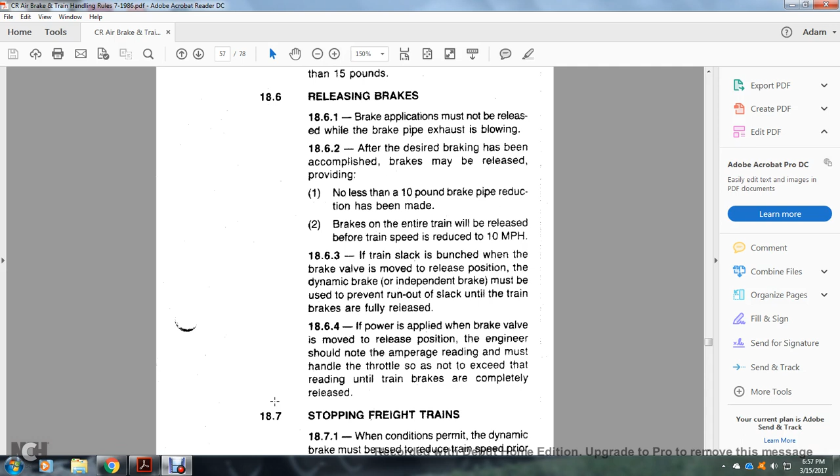18.64. If power is applied when the brake valve is moved to the release position, the engineer should note the amperage reading beyond that handled with the throttle, so that it's not exceeding the reading used until the train brakes are completely released.

18.7. Stopping freight trains. When conditions permit, the dynamic brake must be used to reduce train speed prior to stopping. Allow sufficient distance to ensure the train stops at the desired point, making a minimum brake pipe reduction of 6 to 8 pounds, followed by additional brake pipe reductions as required.

When the train speed is reduced to the point where the dynamic brake is no longer effective, the independent brake valve shall be applied lightly to prevent slack run-out as the dynamic brake is released.

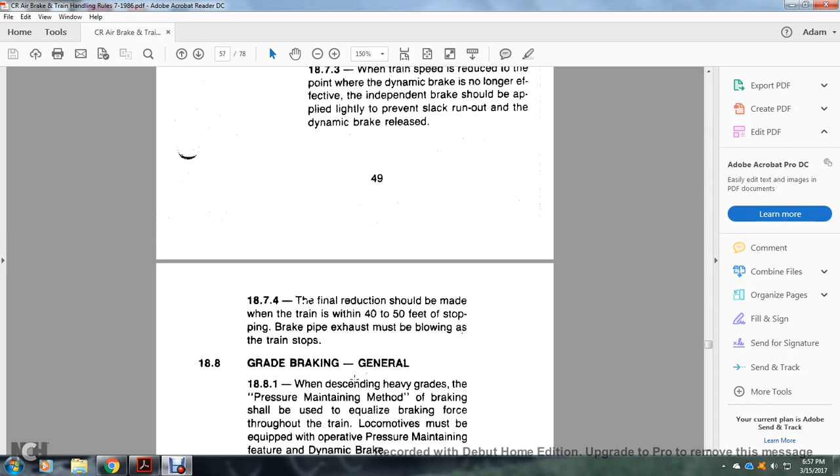18.74. The final reduction shall be made when the train is within 40 to 50 feet of the stopping point, and the brake pipe exhaust must be blowing as the train stops.

Grade braking, general. When descending heavy grades, the pressure maintaining method of braking shall be used to equalize brake force through the train. Locomotives must be equipped with the operative pressure maintaining feature and dynamic brakes.

When locomotives are not equipped with pressure maintaining, trains must be handled in accordance with the non-equipped method of braking, unless specified otherwise in the timetable special instructions.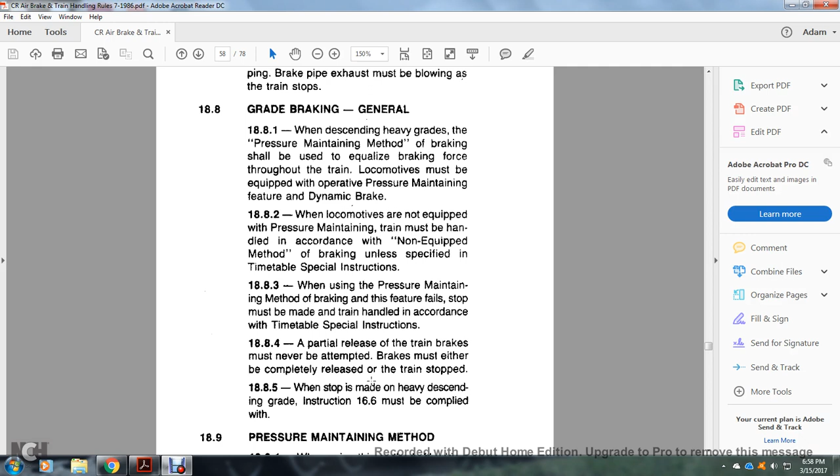Instruction 18.9, Pressure maintaining method. When using this method of braking, dynamic braking should be used to bunch the slack prior to making the initial reduction. The amount of the initial reduction, depending on the percent of grade, weight, and speed of the train, must not be less than 6 pounds. Further light reductions should be made as required to control the speed of the train, in small increments to avoid overbraking. This brake pipe reduction should be sufficient to permit the value of the dynamic brake to be varied and the control speed to change due to the physical characteristics of the railroad.

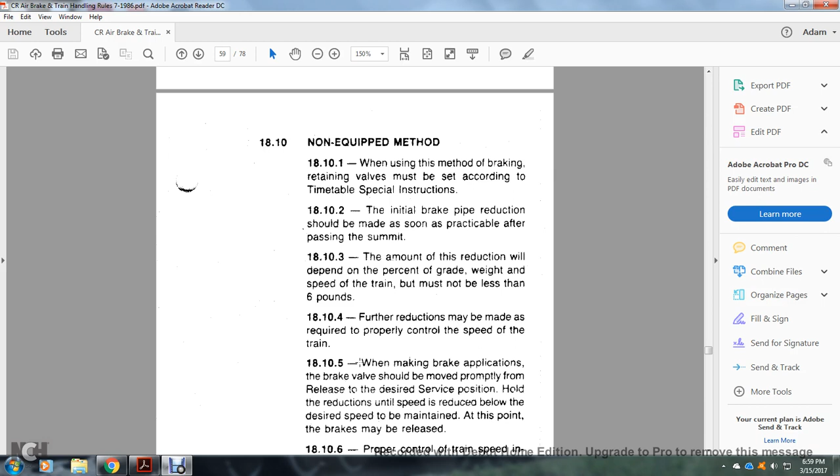Instruction 18.10, Non-equipped method. When using this method of braking, retaining valves must be set according to timetable special instructions. The initial brake pipe reduction should be used as soon as practicable after passing the summit; the amount of the reduction, depending on percent of grade, weight, and speed of the train, must not be less than 6 pounds. Further reductions may be made as required to control the speed of the train.

18.10.5. When making the brake application, the brake valve should be moved promptly to the desired service position. Hold the reduction until the speed reduces below the desired speed to be maintained. At this point, the brakes may be released.

18.10.6. Proper control of train speed involves frequent applications and releases. Retaining valves will act to hold the speed to a slow rate of increase to allow time for the brake system to recharge.

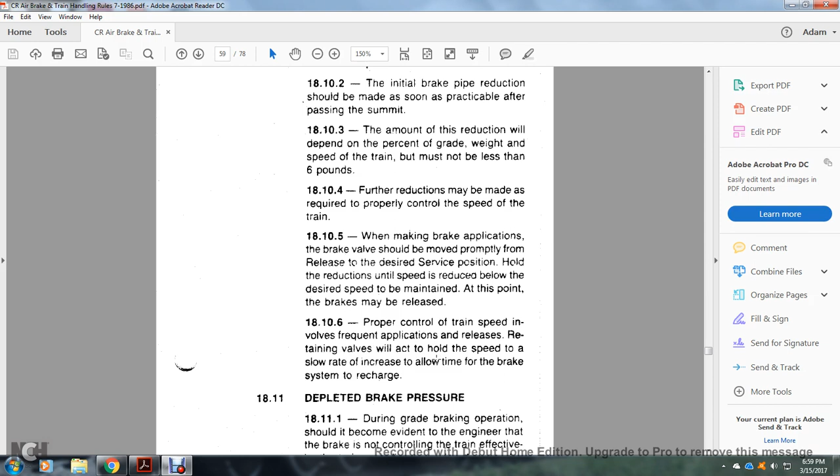Instruction 18.11. Depleted brake pressure during grade braking operation should make it evident to the engineer that the brake is not controlling the train effectively. The train must be stopped and secured.

18.11.2. If the pressure cannot be restored, the conductor and engineer will be responsible for reporting to the train dispatcher, who will issue instructions.

Alright, operation of the equipment.

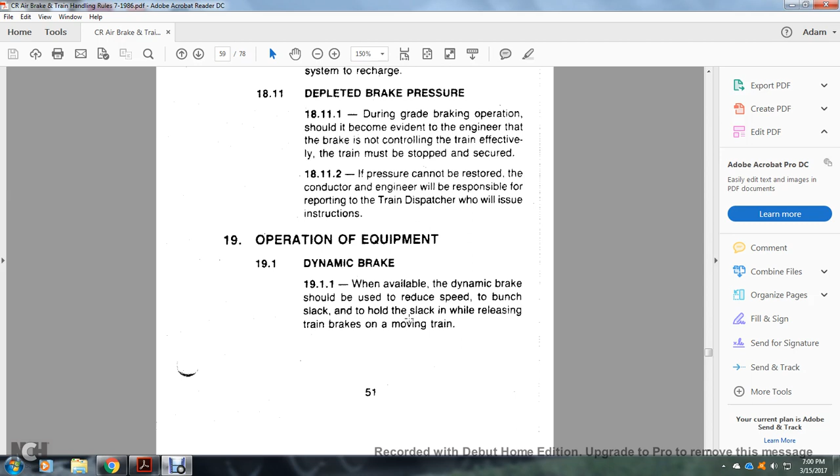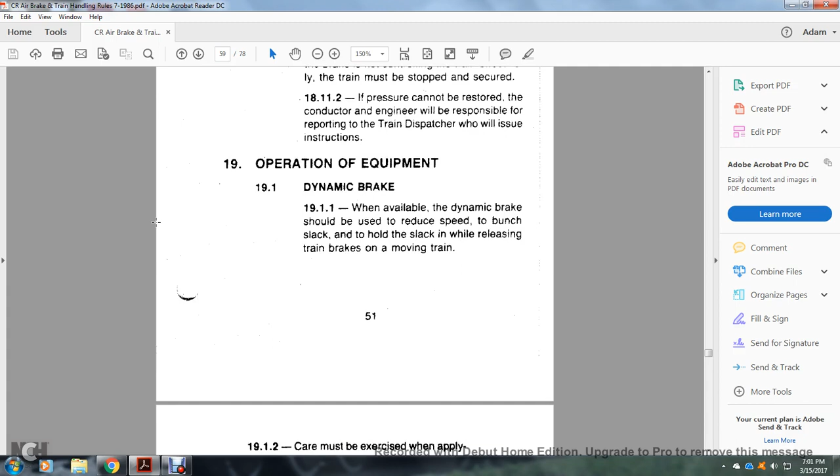Instruction 19, Operating the equipment, Dynamic braking. When available, dynamic braking should be used to reduce speed, bunch the slack, and hold the slack while releasing train brakes on a moving train. 19.1.2. Care must be exercised when applying and releasing the dynamic brake to prevent harsh run-in or run-out of the slack. The throttle must be in idle for 10 seconds before moving controls to set up the dynamic brake. The dynamic brake must be applied slowly and smoothly.

When releasing the dynamic brake, the same precautions should be observed as specified for dynamic brake application. Heavy dynamic braking must be avoided when negotiating turnouts, crossovers, or sharp curves. Dynamic braking must be used independently or in conjunction with the train air brakes, applied when it becomes necessary to stop the train.

The automatic brake must be used, with a minimum initial reduction of not less than 6 pounds, followed by additional brake pipe reductions as required, gradually reducing dynamic brake until completely off. The independent brake valve must not be applied while dynamic brake is applied on the locomotive, as this may cause the wheels to slide.

The independent brake valve handle should be depressed frequently when the automatic brake valve is applied in conjunction with the dynamic brake, to avoid wheel sliding. Effective June 15, 1986, when dynamic braking force becomes ineffective, the independent brake may be applied gradually while moving the dynamic brake control to the off position.

19.1.12. Trains other than solid loaded grain or mineral freight having 3 to 6 motor units equipped with the extending range of dynamic braking must reduce to the 1/2 position on the dynamic brake control at speeds below 15 miles per hour.

19.1.13. Trains having 4 to 6 motor units equipped with the extending range of dynamic braking must reduce to the 1.5 position on the dynamic brake control below 20 miles per hour.

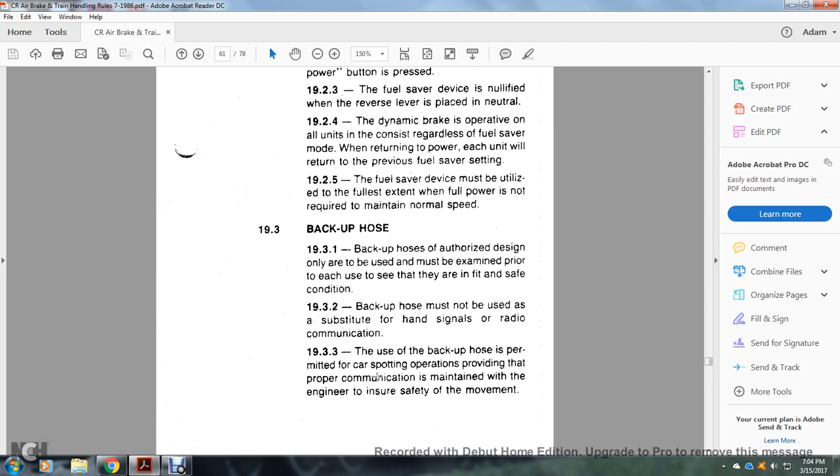The use of the backup hose is permitted in car spotting operations provided that proper communication is maintained with the engineer to ensure safety of the movement. Before starting any operation where the backup hose is used to control spotting of the car, the trainman and engineer must communicate to ensure that both understand the move being made.

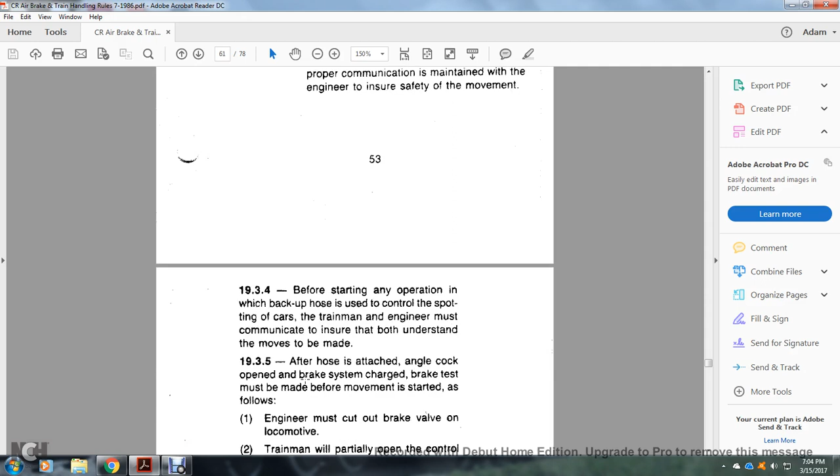After the hose is attached, the angle cock is opened and the brake system is charged; a brake test must be made before the movement is started, as follows: the engineer must cut out the brake valve on the locomotive, then the trainman will partially open the control valve by turning the handle slowly toward the position crosswise of the hose.

Observe the brakes apply on the car. The engineer, after noting the brake pipe reduction, will give the trainman the proper signal and will cut off the brake valve. The engineer will control the movement in accordance with the signal from the trainman properly.

After the backup movement is started, the trainman will make an application of the brakes to determine the effective braking force. If such an application is not observed, the engineer must stop the movement and investigate the reason. Observe that the application of the brakes is made by slowly opening the valve until the desired brake effectiveness is obtained. The valve should not be opened more than 2/3 unless an emergency application is desired.

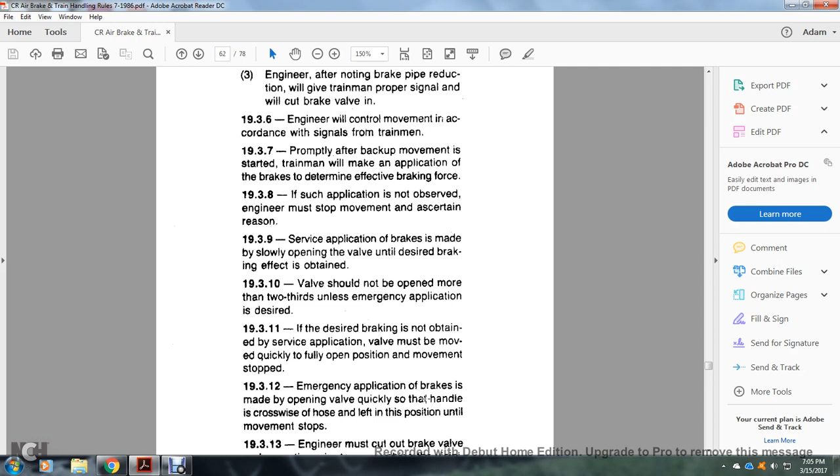If the desired braking is not obtained by service application, valve must be moved quickly to the full open position and the movement stopped. 19.3.12, an emergency application of the brakes is made by opening the valve quickly so the handle is crosswise of the hose, left in that position until the movement stops.

19.3.13, the engineer must cut out the brake valve on the locomotive prior to approaching the vicinity where the stop is to be made. 19.4, caboose valve.

The brakes must not be applied from the train except in case of emergency. In making backup switch movements whenever possible, the trainman must endeavor to attract the engineer's attention by radio signal before applying the brakes from the train.

To make a service application with the caboose valve, move the handle clockwise to position 2. Leave the handle in the second position for at least 20 seconds, then move the handle to the third position. Leave the handle in that position until the train has stopped.

If the speed of the train is not being satisfactorily reduced with the handle in position 3, then after 1 minute, move the handle quickly to the extreme application position. Leave it there until the train stops.

To make an emergency application, move the handle quickly for release to the extreme application position and leave it there until the train has stopped.

19.4.6. After the handle has been moved to any application position, it must not be returned to the closed or lap position until after the train has stopped. The handle must be moved to the extreme application position before moving it to the closed or lap position.

19.5. Brake pipe flow indicator. The brake pipe flow indicator may be used to determine the following information: the brake system is charged when the brakes are released on the rear train, the brake is being applied from the train, heavy brake pipe or system leakage, or a parted or burst air hose.

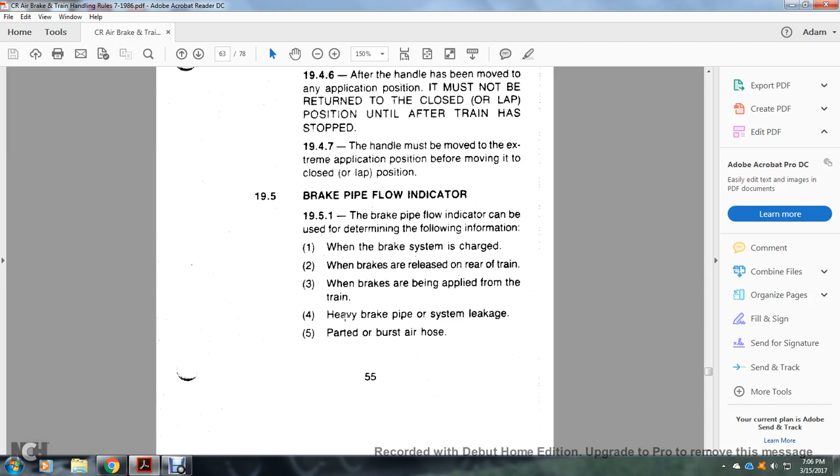19.5.2. The numerals of the flow indicator dial indicate the rate of airflow within the brake pipe. The numerals do not indicate the brake pipe leakage in pounds per minute. The position of the black hand should be noted at the time of departure of the red hand, set one number greater than that, and then it is used as the reference mark.

Any movement of the black hand to the right of the reference mark indicates greater airflow of the brake pipe, which could be caused by a burst air hose, broken pipe, or brakes being applied from the train.

When the indication is that brakes are being applied from the train, the throttle and brake valves must be handled as described in Rule 16.2.

Retaining valves will be used where specified by the timetable special instructions, or at any time on a grade when in the judgment of the engineer or conductor it is necessary to properly control the train. When retaining valves are not in use, place the handle in the direct exhaust position. The conductor will be responsible for the proper position of the retaining valve handles on the cars.

This applies to cars added to the train en route. There are two types of retaining valves used on freight cars: the 3-position type and the 4-position type.

Low pressure handle is horizontal in position and only used with the 4-position type. The brake cylinder pressure exhausts slowly to 10 pounds, which is retained until the handle is turned to exhaust, then slow to direct exhaust.

Handle at 45 degrees above the horizontal: brake cylinder pressure exhausts slowly, no pressure is retained.

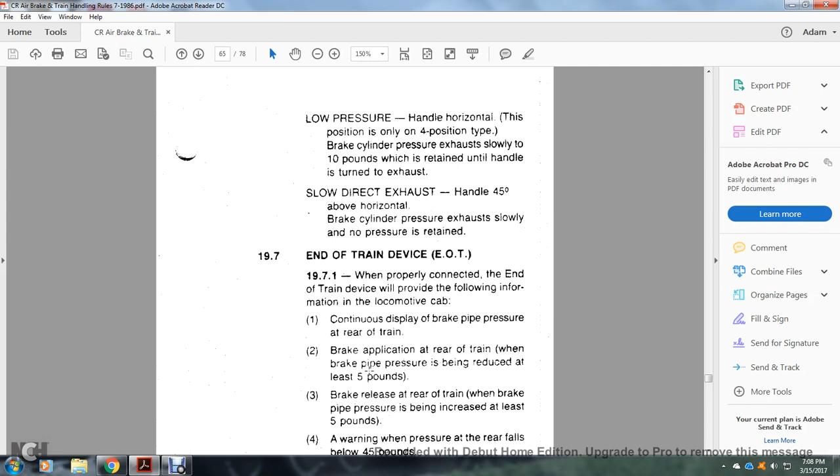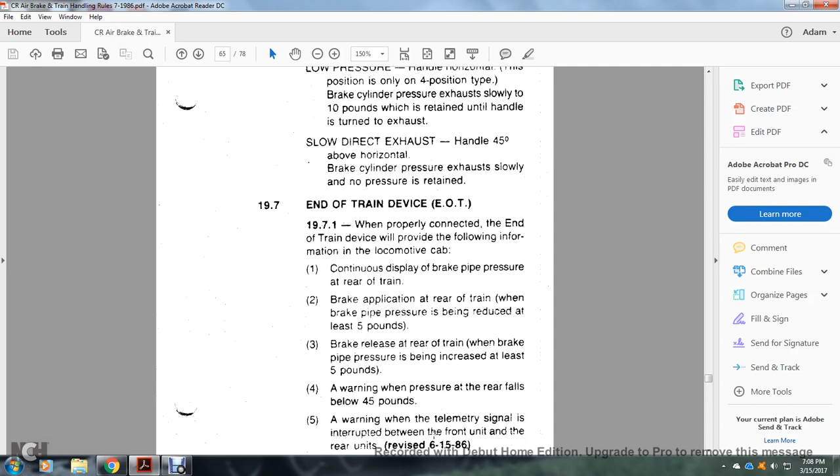Brake release at the rear of the train when the brake pipe pressure is being increased at least 5 pounds, a warning when the pressure at the rear falls below 45 pounds, and a warning when the telemetry signal is interrupted between the front unit and the rear unit. Revised June 15, 1986.

The rear unit must be securely attached to the trailing coupler at the rear of the car, with the brake pipe hose connected onto the unit, then the angle cock opened slowly.

Each rear unit is factory coded with a unique identification number, which is included in each radio transmission. The front unit is provided with an ID selector to receive transmissions from only the specified rear unit. At least 5 digits of the ID number displayed on the rear unit must be selected and dialed into the front unit.

Once communication is established between the end of train device and the front unit, the ID selector must not be changed. The rear unit is provided with a means of visually displaying the brake pipe pressure measurement. This display may be used to comply with the requirement that pressure be indicated with an accurate gauge at the rear of the train.

After receiving the low pressure warning, if the front unit display of the brake pipe pressure reading remains under 45 pounds or a no air warning is displayed, the train must be stopped promptly for inspection.

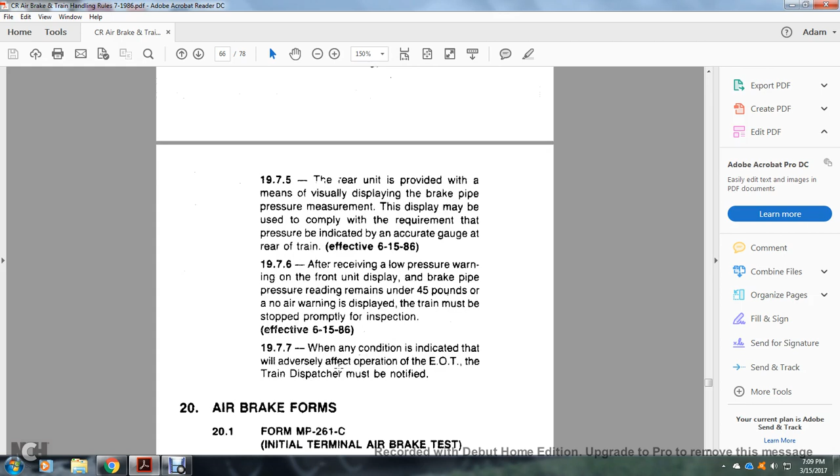When any of these conditions would adversely affect the operation of the end of train device, the train dispatcher must be notified. Air brake forms, 20.